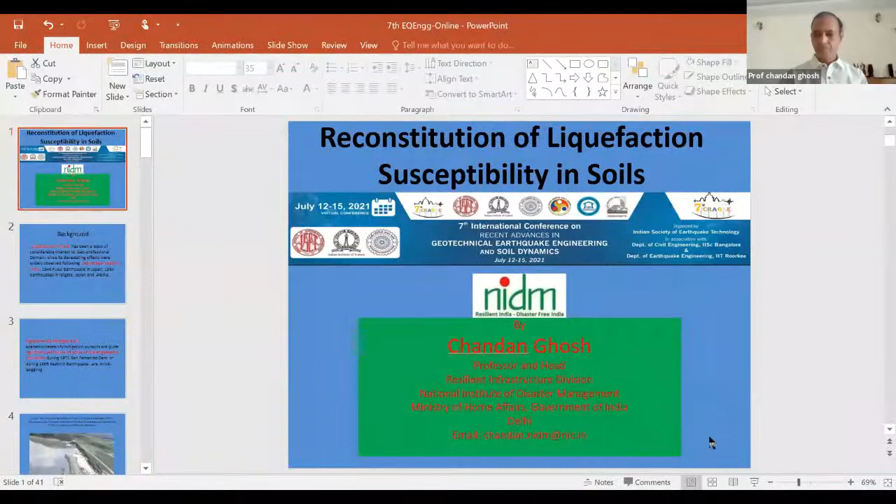So today's presentation is about an experiment conducted mainly in my room by one of the students, and also in a laboratory, that I would like to show how simple an experiment can be, despite all the talking, researching, and knowing so much about liquefaction.

So, reconstitution of liquefaction susceptibility in soil - this sort of experiment was never done in a laboratory. It was done in my office room, and also at HYCO, with Jitendra Singh, who is no more, but we conducted this test in his manufacturing hub in Naraina, Delhi, with the help of one of the students, Supratim Bhomik. I'm going to present this, which was done more than 6 years back but still not published.

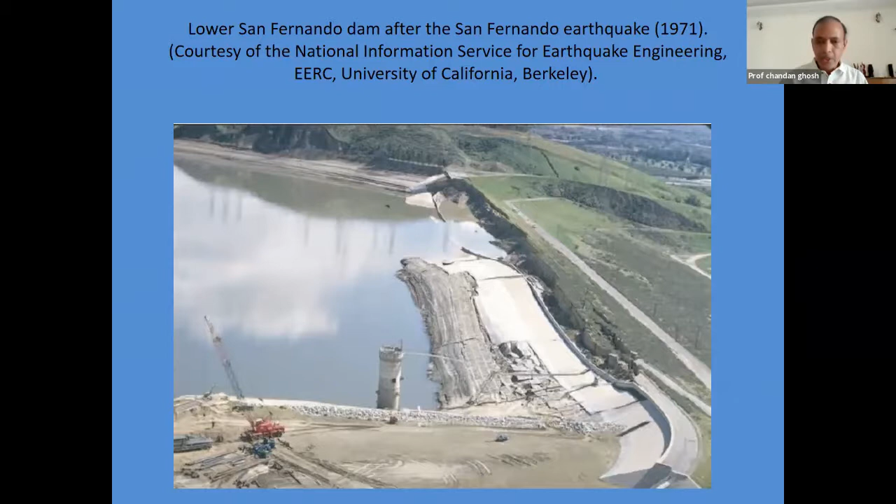Such things happened even in 2005 in the Kashmir earthquake - see what signatures it gave, where study is unending. There are more than 2,000 such instances counted - not research, because nature is the same, but in hilly areas our understanding of liquefaction, while basic, requires exploring and solving the problem, which is our main aim. From that count, there are many such reports available, even from the Muzaffarabad earthquake.

This is the most recent one, from April, which is more than 100 kilometers away from Guwahati. Even then we have it, because the Brahmaputra river basin is there. And the most important signature is this, that where the structure didn't fail, but liquefaction has occurred.

That has opened up many things, especially after 1969-70 onward, the SPT-based, CPT-based liquefaction study. I'm not going into that detail. I'll go directly into what inspired us to go for such kind of experimental study to visualize the liquefaction.

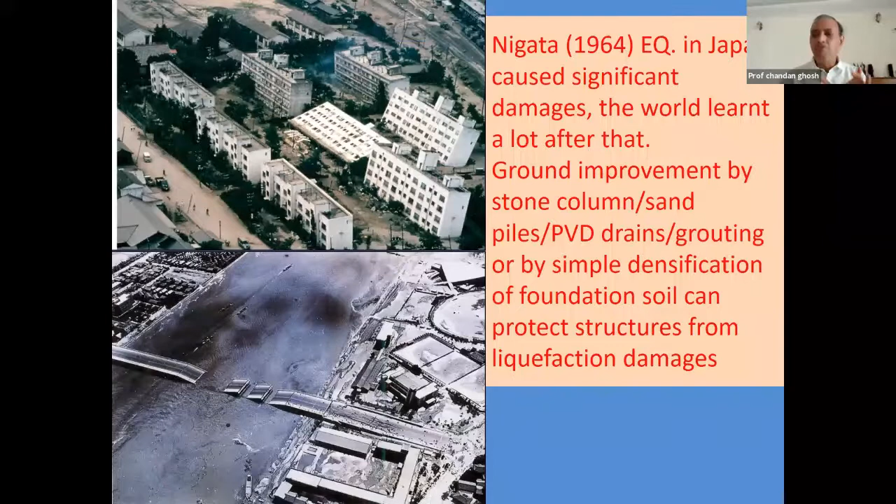In a most ordinary manner, but with clear fundamentals. This is the important investigation available in the literature, done in 1964 after that earthquake, about why it went wrong. Most cases involved reasoning and back analysis, saying this pier bent this way or that way due to lateral spreading - a new term that came up. We've done a number of such studies in centrifuge and shake table tests to recreate this situation, and also changed the codal guidelines in Japan and elsewhere.

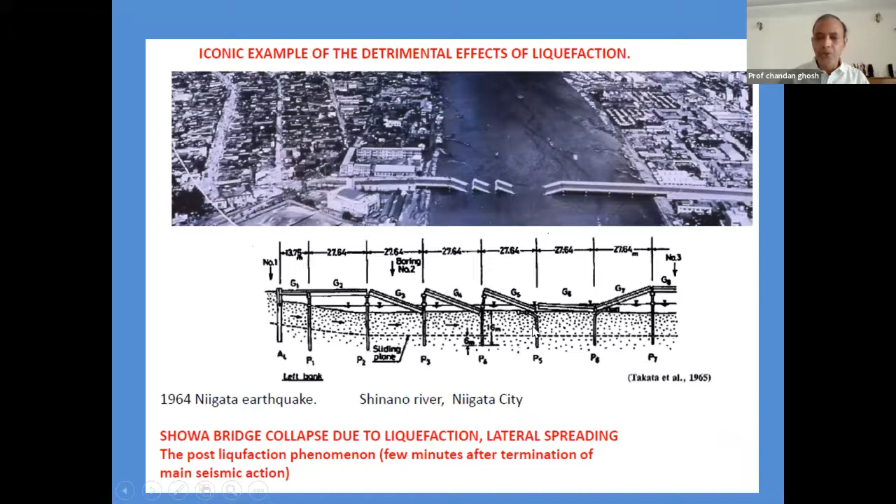Such revelations are well known, along with many laboratory studies, especially the cyclic triaxial test, which is very costly and time consuming, but yet very fundamental to understand liquefaction. So far the science of liquefaction is known and understood, but the application part and making it a simpler experiment is what needs to be looked into.

Most researchers successfully employed laboratory testing and theoretical analysis starting from the 1964 earthquake, especially 1969 onward, based on field penetration tests, then drew crucial conclusions on whether it is liquefiable or not. But in situ liquefaction study is also being done - instead of indirectly inferring from SPT, CPT or BPT data, rather going for SCPT tests to see whether liquefaction is occurring, or creating liquefaction in situ.

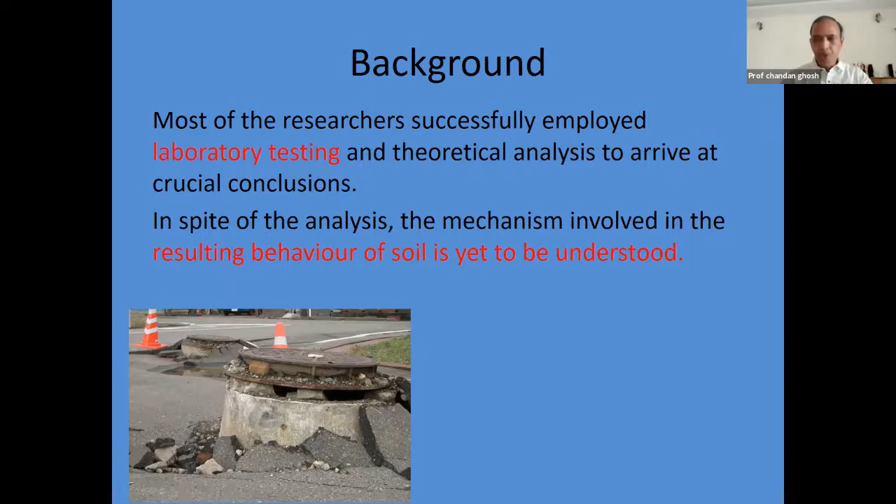But these are very fundamental as well as costly. They are more positive, and understanding becomes clearer through direct rather than indirect causation of liquefaction, which has attracted many researchers in this area. So despite the analysis, the mechanism involved in the resulting behavior of soil is yet to be understood to a larger extent. But still, this will keep going - since 1964 we have been doing this, and we'll keep doing it.

There are many things happening - retaining wall failure, floating of buoyant and buried structures. Thousands and thousands of such structures are being documented, recorded, and reasoned out as being due to liquefaction. But simply saying it is due to liquefaction doesn't satisfy us. We have to go for particular measures to deflate or reduce the pore water pressure, even where clogging occurs in many drainage systems, where they cannot function during that period.

So declogging of the same in situ - some of these measures have not come much into practice, especially when our earth structures face liquefaction in earthquake-prone areas.

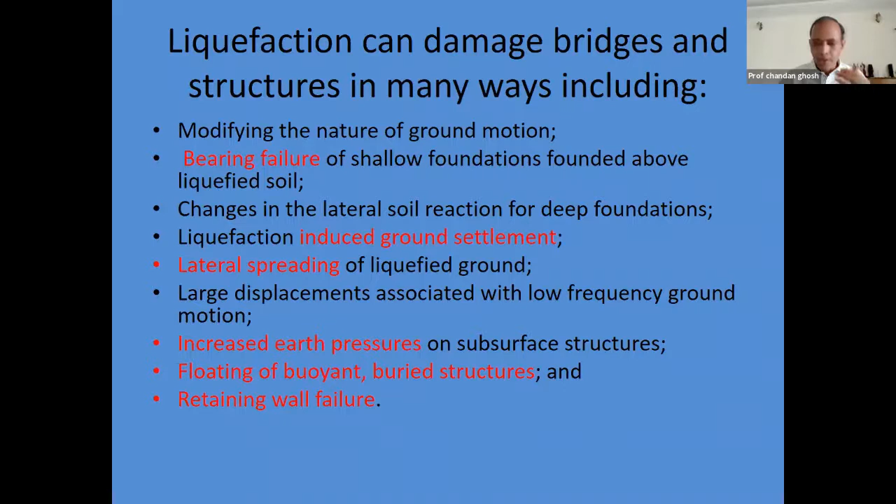So the scope of the lab study is to capture the liquefaction phenomena in sandy silty soil. We have taken 9 types of soil, particularly Yamuna sand. We have done seismic microzonation, where Dr., the chair of this session, was very much involved in the thick and thin of this microzonation study, making it to a 10,000 scale, published in 2015.

Initial internal excess pore water pressure measurement is one of the things during liquefaction. Just when liquefaction is happening, we do not have much live record of this, except in some systematic laboratory studies. Some systems are in place, and now we have many IoT systems to capture what is actually happening inside the soil. So we have tried to go into that.

Using an open stand pipe placed inside a loose soil specimen subjected to manual and dynamic excitation, which I'm going to explain in detail.

An attempt to avoid using costly equipment, because recently our high-speed train contract was taken up - bullet train from Surat to Bombay. There, every meter an undisturbed sample is to be taken according to specifications given by the Japanese organization, and triaxial test, cyclic triaxial shear test, everything has to be done. If as per those specifications along 500 plus kilometers all these tests are to be performed, it will take at least 10 years to complete, even if we establish 50 laboratories in the country.

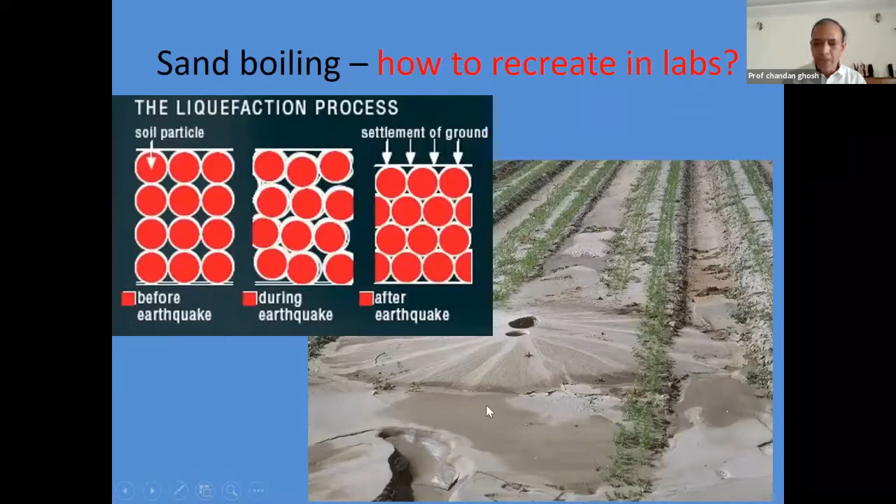So the inspiration for this work is whatever is happening - sand boiling - these are the things available in the literature. So we have taken out, trying to see how to recreate liquefaction in the laboratory. This is the kind of inspiration that has come from here, with the background that I wanted to say.

So creating a liquefaction effect by simply tamping in this manner. Taking a 500 ml Coca-Cola bottle or any kind of 500 ml plastic bottle, and a 2000 ml bottle, and also a 5-liter plastic bucket or container which is transparent, where we can visualize what exactly is happening there.

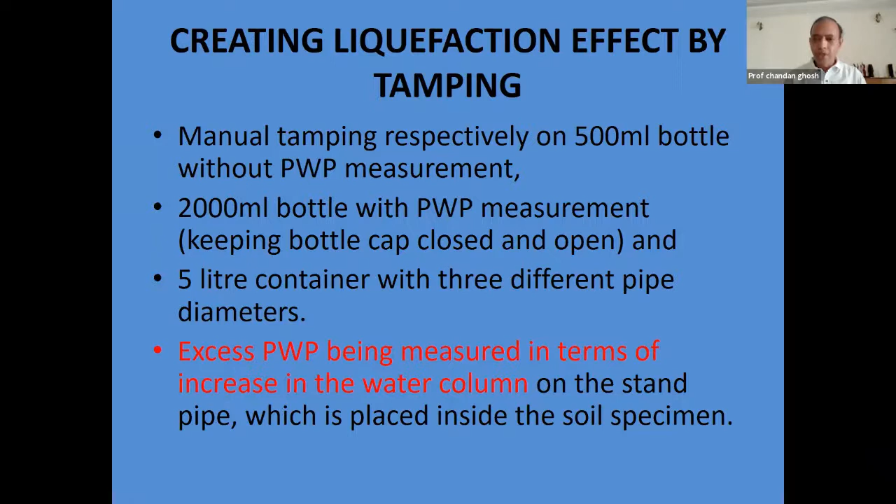Measuring excess pore water pressure in terms of increase in water column in a small 0.5 millimeter standpipe which is placed inside - that is equivalent to pore water pressure. Whatever water height is increasing, which is placed inside the soil, that is being measured.

So soil is taken here, different types of soils are taken and grain size analysis is being done. This indicates that there is some clay soil also taken, stone dust also taken just to measure. Clay soil doesn't liquefy. Even some stone chips are given, and coarse sand is also taken.

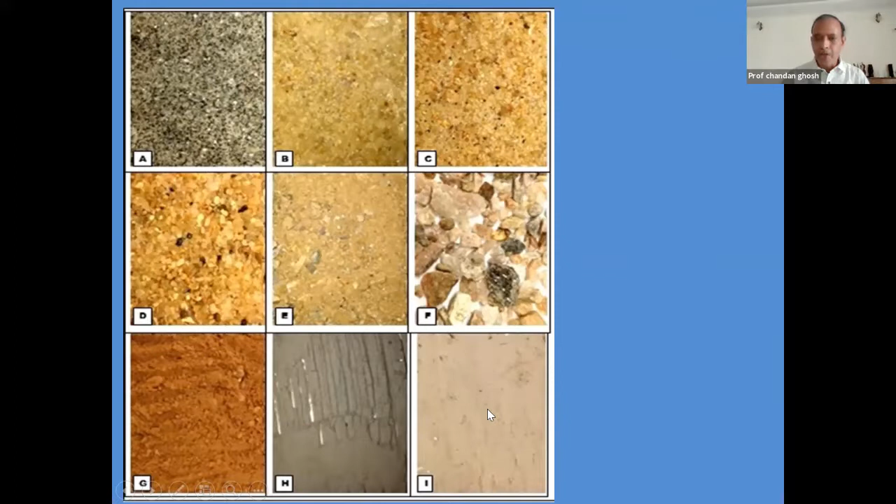So there are 9 different varieties doing the same series of experiments, and all are being shown over here - stone dust and Yamuna sand, one from Calcutta, and two soils from other river sand. These are all local names given over here. Fly ash is also taken because it is very simple.

I have to use only a bottle which is freely available. Fly ash is available nearby. So fly ash, stone dust, clay, pebbles, Badarpur well-graded sand, which is used in most of our household purposes. Then, because the researcher/student belongs to Tripura, he got 2 sands from Tripura - Khowai coarse sand and Gomoti medium sand near Agartala.

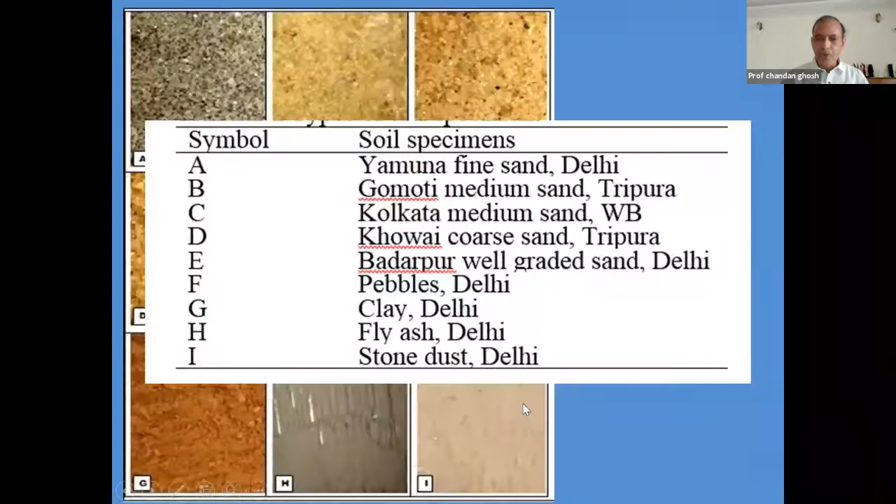So these are stone dust, clayey soil, and Yamuna sand - it is all written over here. In this case, we did not put any kind of pore water pressure device. We didn't put anything like that, but simply tamped the bottle, put the water, kept the cap closed, and some plastic balls are given.

Plastic, meaning rubber balls, are given to ensure that in this much sand, whenever preparing the soil specimen, it will be in the loosest condition if we make it this manner, and the ball that we have put inside should be embedded into the soil that we have taken.

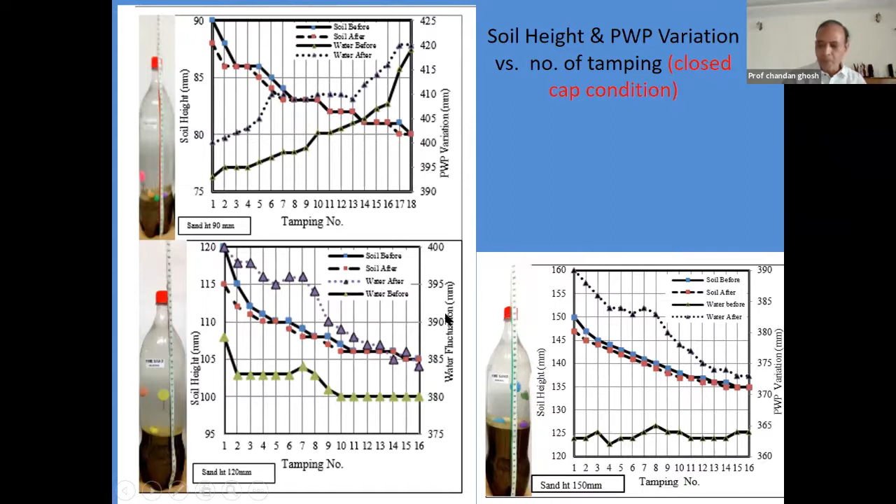In the closed cap condition, you can see the cap is closed. So all these things are being plotted. With this simple experiment, we are able to measure the pore pressure variation, water height before and after - everything can be measured over here. Similarly, water fluctuation versus number of tamping is recorded for each type of soil.

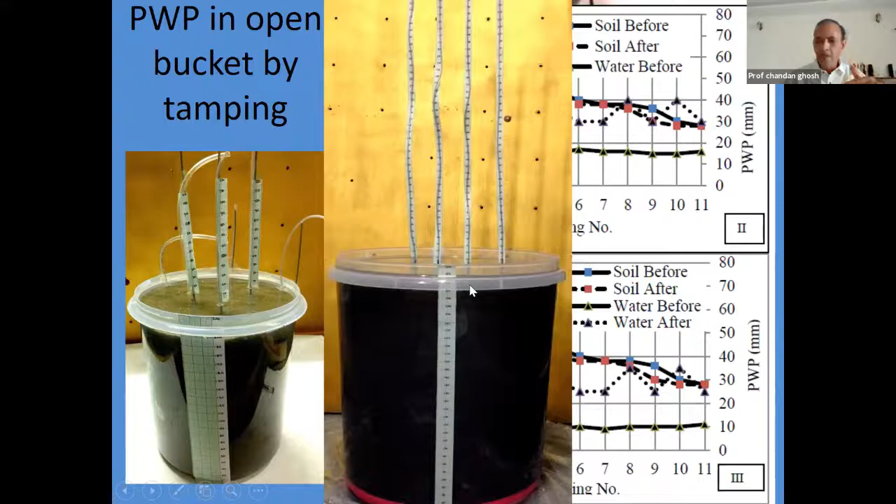We could see what the pore pressure rise is while varying the pipe diameter. So with each pipe diameter, how much variation occurs is also measured in this simple experiment. Here you see the systematic arrangement before testing, and this is after testing, where you see the water that came out. But measuring this, 3 pipes are placed at 3 different heights to check the relative variation of the pore pressure developed during this experiment.

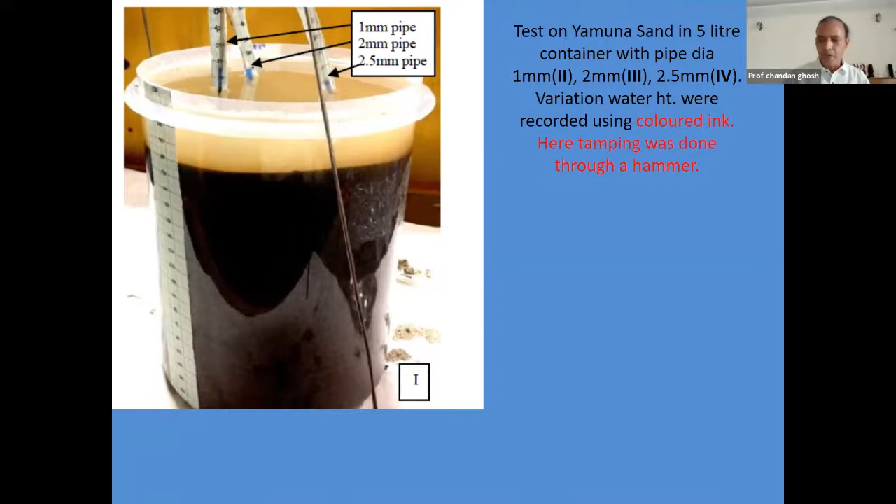Here you see 1 millimeter, 2 millimeter, 2.5 variation in water height, with colored ink placed inside so they can be differentiated. All these observations were made and results are plotted with this hammer height. We also checked in a standard jar how the sand height is variable - you see this much, this much, this much - to understand how liquefaction can occur, because we know overburden effect is an important consideration.

So we have done this type of test also to check up to what height or overburden liquefaction may occur or may not occur. So we captured excess pore water pressure during dynamic excitation.

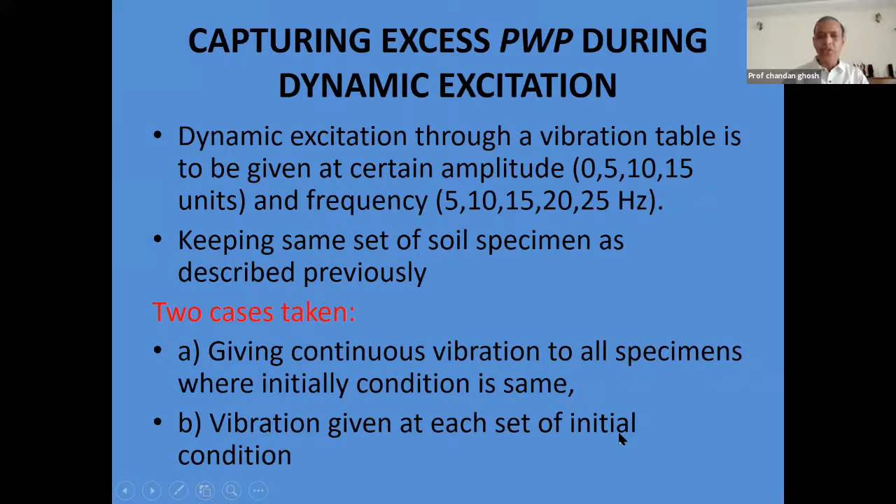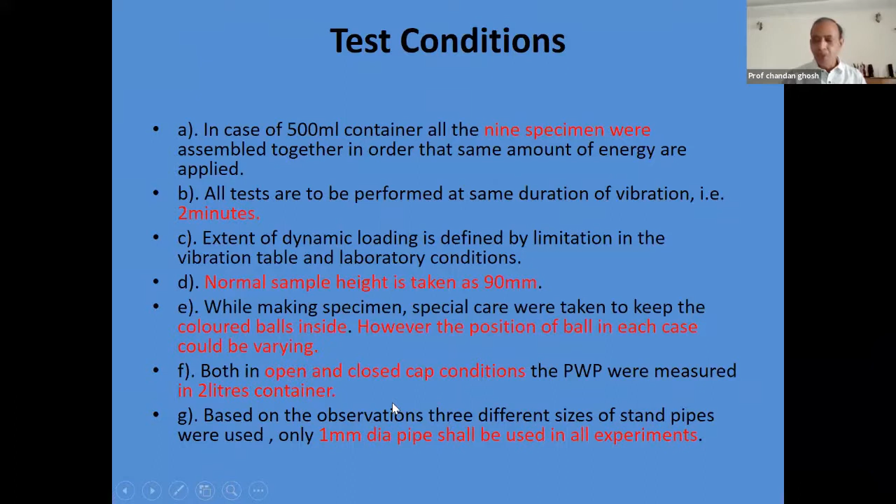Further work is also necessary. Things are not as simple as we thought; there are many ifs and buts. Accuracy matters too - many times we may say it should not matter much, but in some cases accuracy is important.

It is enough for the last 60 years or so to know the science of liquefaction, but recognizing where it is going to happen, rather than just saying these are the areas according to the seismic microzonation map where liquefaction potential exists or liquefaction is not going to occur - that is one part, but going for direct liquefaction measuring is really helpful.

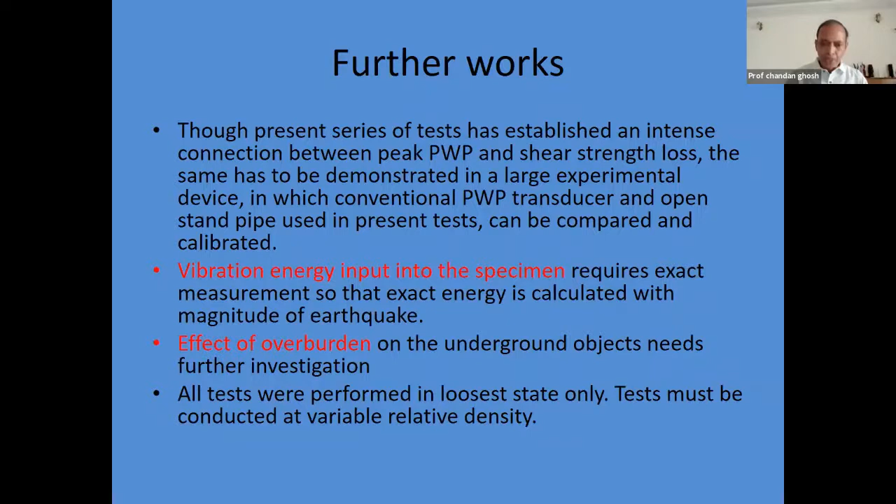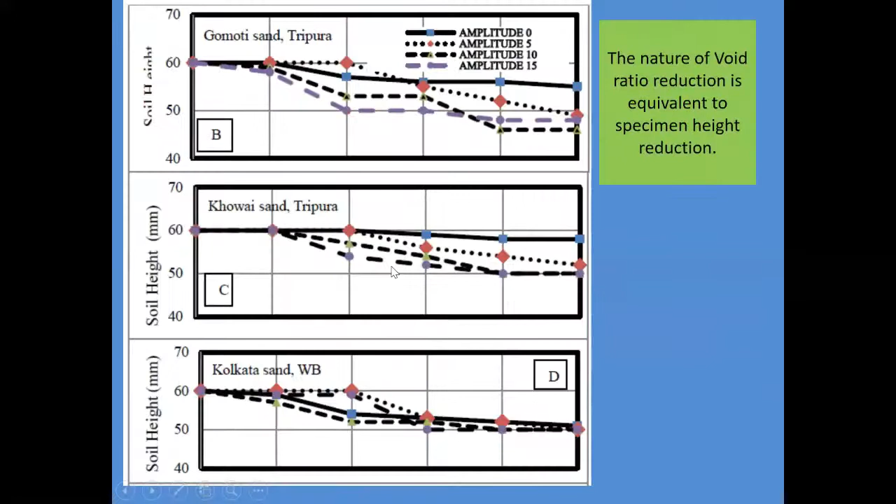So variation of soil and frequency - these results that we have taken, of course there's not much time to describe all of them, but the nature of void ratio reduction is equivalent to specimen height reduction.

These are all plotted - height versus frequency and amplitude versus frequency, and also the container with excess pore water pressure in the large container is shown, along with various levels of sophistication. We tried measuring 50 millimeters from the bottom of the container at different heights.

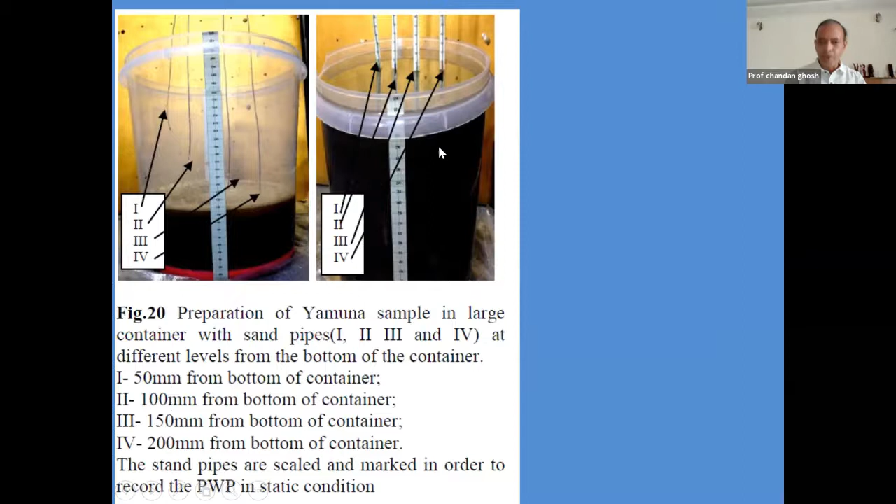Four such pipes are placed so they can capture liquefaction - at 50mm, 100mm, 150mm, and 200mm from the bottom along this setup. These were set during experiment preparation, and results are presented here.

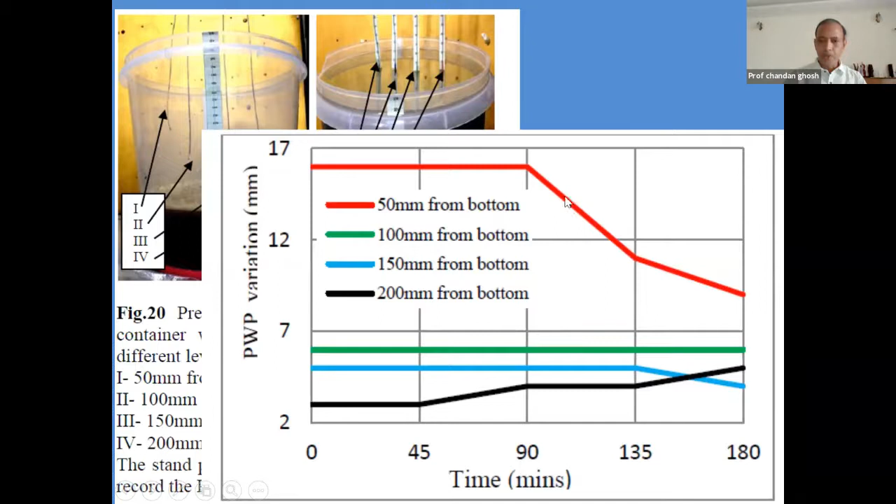At 50 mm you see the drastic reduction. With time, you see how it is being reduced. This shows the arrangement made before and after - due to vibration, as well as tamping by hammer, which was also done.

Pore water pressure variation with frequency - whatever frequency we gave, because we know earthquake frequency varies maximum around 5 to 15 Hz. We kept this in mind so our frequency variation in the laboratory stayed within that range, since 5 to 20, or maximum 5 to 50, is the dangerous range.

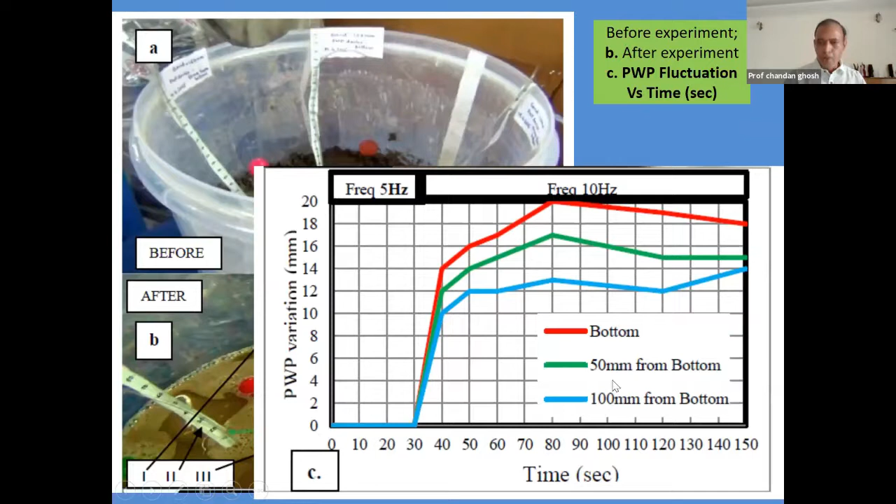So in that range, we observed how the bottom 50 millimeter sensor and the bottommost one varied in pore water pressure, expressed in millimeters.

Conclusion: experiments on the large bucket gave full understanding of the liquefaction phenomena, in which pore water fluctuations were measured and presented with duration of vibration input within the standard range of earthquakes that affect our structures. Underground utility response was tested with lighter rubber balls and heavier balls, showing a marked example of liquefaction induced buoyancy effect.

The effect of overburden was tried by keeping the object at a fixed level, but under the present context, no liquefaction effect could be seen. However, in all the tests, except for low energy input - say amplitude 0 and 5 Hz - Yamuna sand taken from Delhi showed marked liquefaction.

So finally, I want to say so much about proving science - of course proving science through testing, checking, laboratory work, direct measurement, and many sophistications that we have done. The science of pore water during liquefaction is really known to us.

But what nature has ordained to mankind from the beginning - the slides, or thousands of such failures that have taken place - in that case, going in one direction of knowing the liquefaction opportunity or occurrence, we have known that liquefaction will occur, but there is hardly any proof, whether through microzonation or through such laboratory and field study, that liquefaction identification maps have been made.

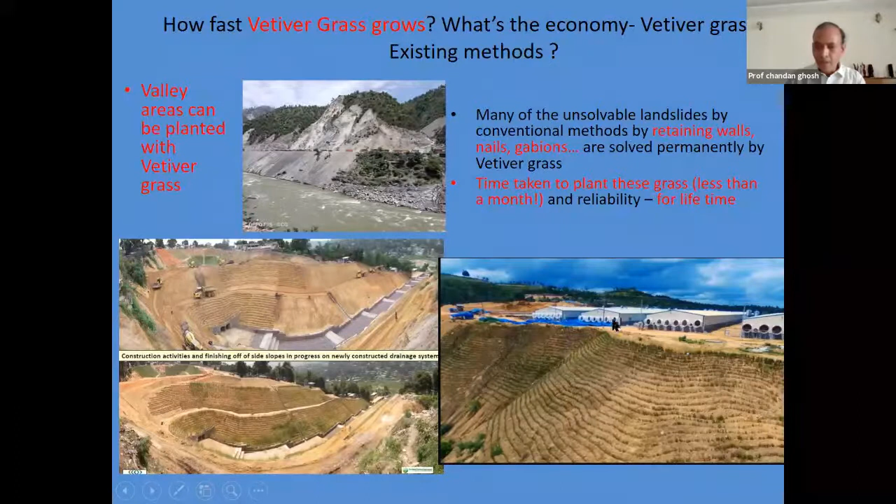So in that regard, we must go back to what nature has been telling us. Not saying this is exclusive, but many such geostructures and earth structures carry such scars in our construction. This is Jammu, where highway construction is going on, but here no retaining wall or nailing is done. It is simply stabilized by nature's gift, that is grass. This has given us such learning, that we can change our way of living and thinking using this simple erosion control measure.

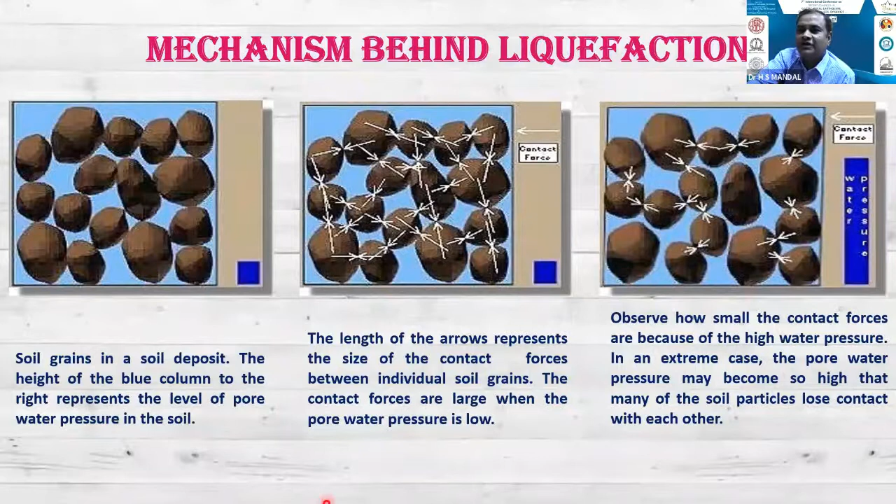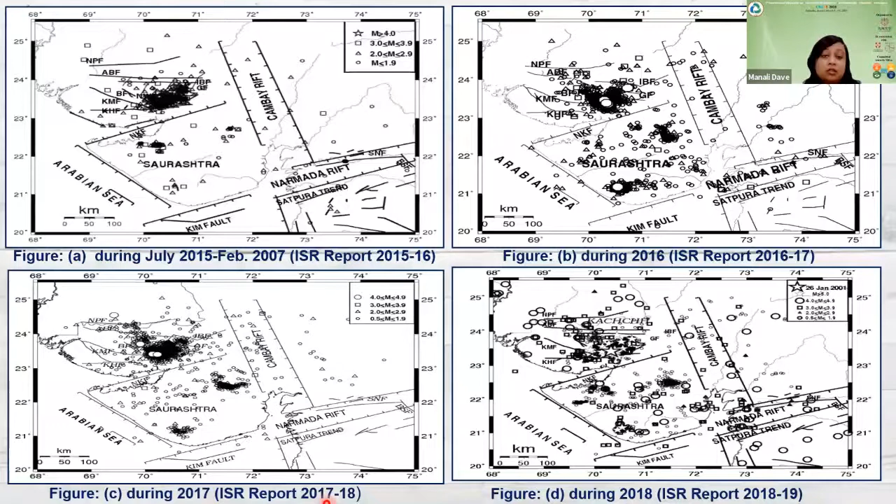These are the ISR, Institute of Seismological Research reports, and this shows the past earthquake data. This is the study area, Ahmedabad city, which falls under zone 3.

The historic seismicity of Ahmedabad is related to the Cambay fault, near Cambay East, Cambay West, and the Son Narmada fault, which are very active faults. Due to the Bhuj earthquake, Ahmedabad was also affected, so it is not only a near field but also a far field source of earthquake.

We need to study the anthropology of various aspects like area, coordinates, population of the city, historical monuments and industries, as well as geological aspects such as the type of soil and the condition of the Sabarmati River.

The Sabarmati River in Ahmedabad city originates from Rajasthan's Dhebar Lake, and it carries alluvial soil deposits.

The silty soils are the most prone to liquefaction, so in Ahmedabad city, most of the soils are silty soil.

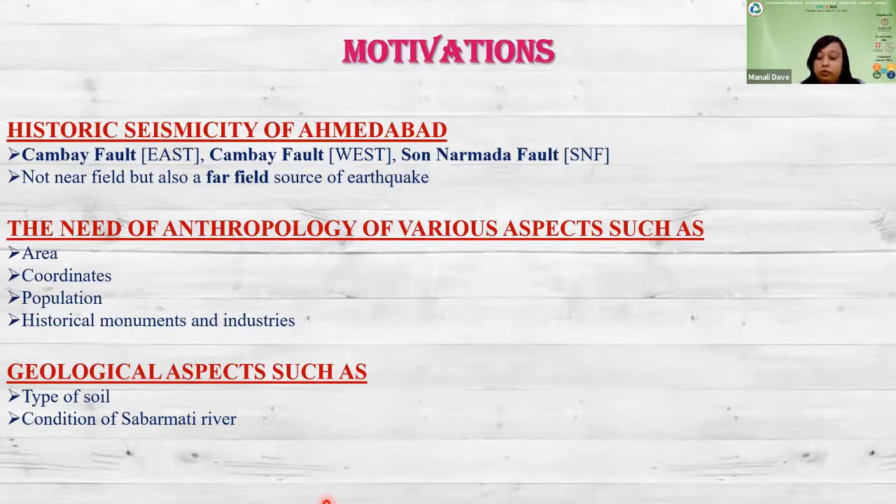The construction of the riverfront made the water table very high, and a recharge well was required as per AMC guidelines: one recharge well at every 500 meter square area is necessary.

With the upcoming construction due to high population and scarcity of land, there's vertical construction on filled up soil. Many ponds, like 56 ponds in the city, were filled up in past years to arrange space for apartments, so many buildings are standing on sandy soil.

As per the Bureau of Indian Standard, the city falls under zone 3, which is the moderate zone of earthquake. That's why the liquefaction assessment is necessary.

Coming to the literature review, we have reviewed various papers. I'm not going much into the detail.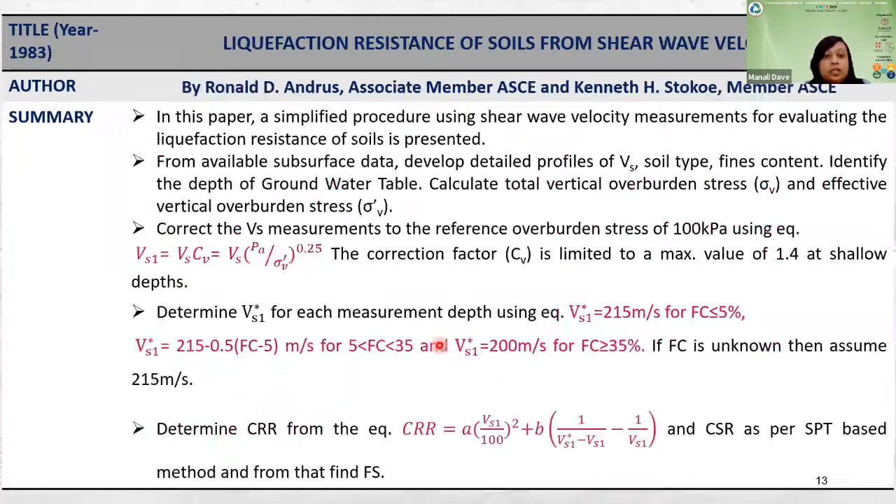Soil characterization, as we all know, Ahmedabad has silty soil, so most of the area is covered by silty soil and sandy clay.

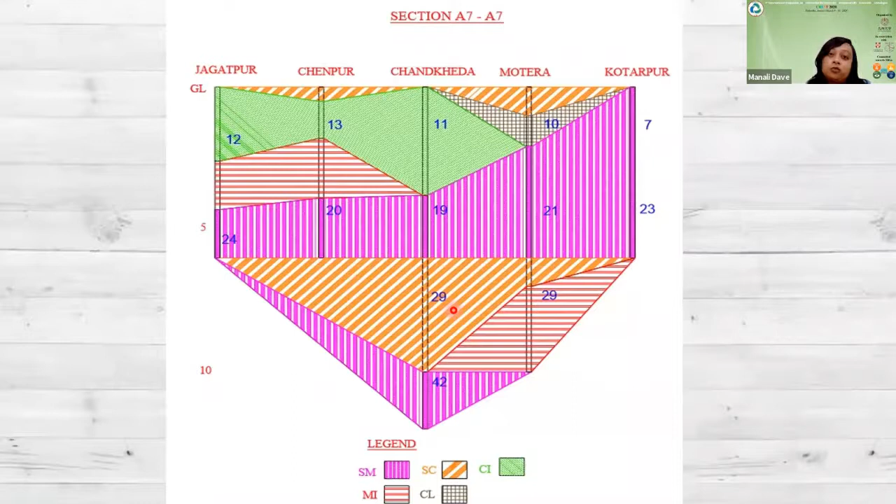These are some site characterizations we did. We collected the borehole data, and silty sandy soil is there.

Two methods we have adopted: the Idriss-Boulanger method and the Andrus and Stokoe method. Then we come to the results.

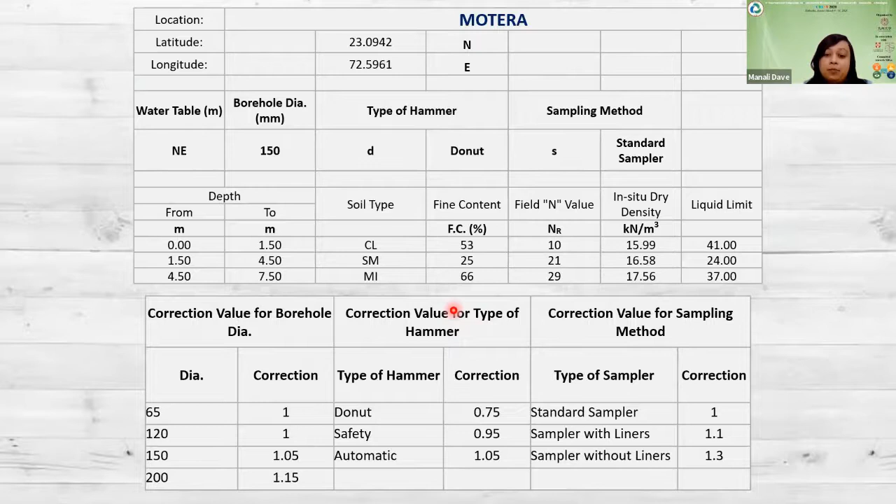I have taken one example. We did the liquefaction analysis of 88 areas of Ahmedabad city, and from that I took one example. We did the detailed calculation from the fine content, hammer type, sampling method, and type of sampler we used, and we applied all the corrections.

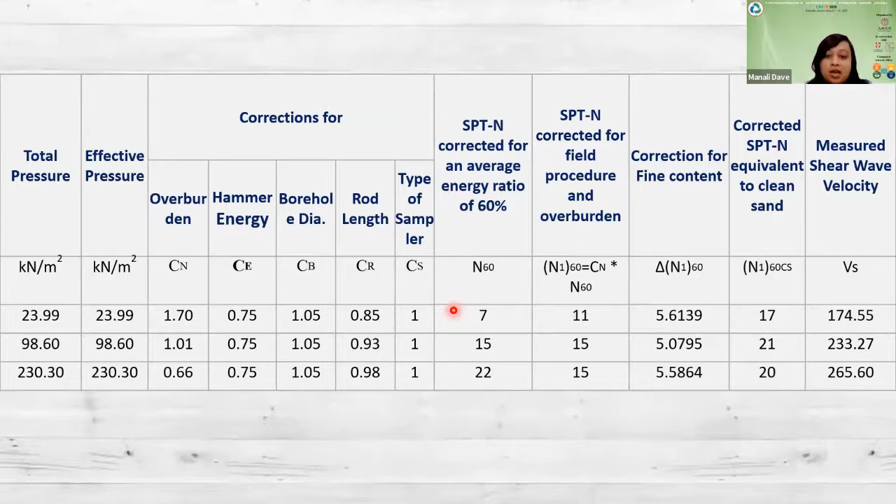For N160CS, the clean sand equivalent, we converted the SPT value to the clean sand equivalent, and the shear wave velocity we took from various equations that past researchers have provided.

Then this is the total pressure and effective pressure. Then we found the CSR and CRR, and finally the factor of safety from these two methods.

We took the magnitude as 7.7, the Bhuj earthquake magnitude, and we took the peak ground acceleration as 0.3g. We also assumed that if the water table rises to ground level, then we calculate for that too.

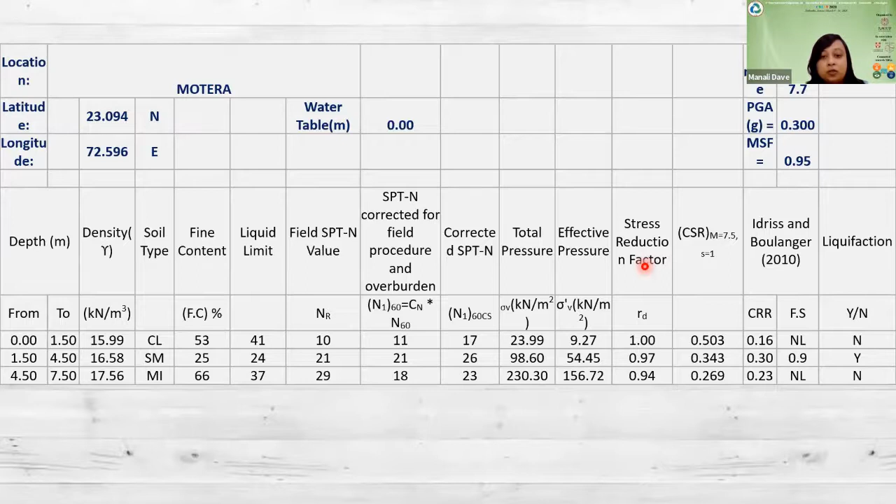I have not included that here, but we assumed the water table is at ground level, and we also did the calculation for the same.

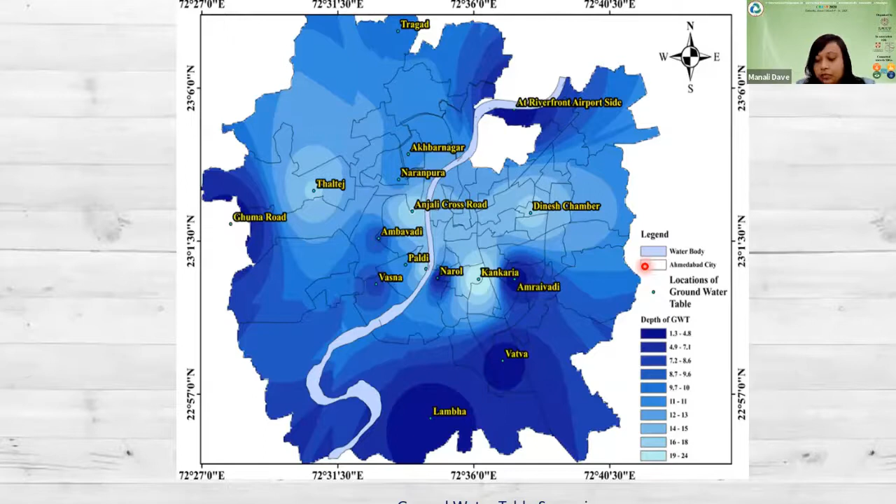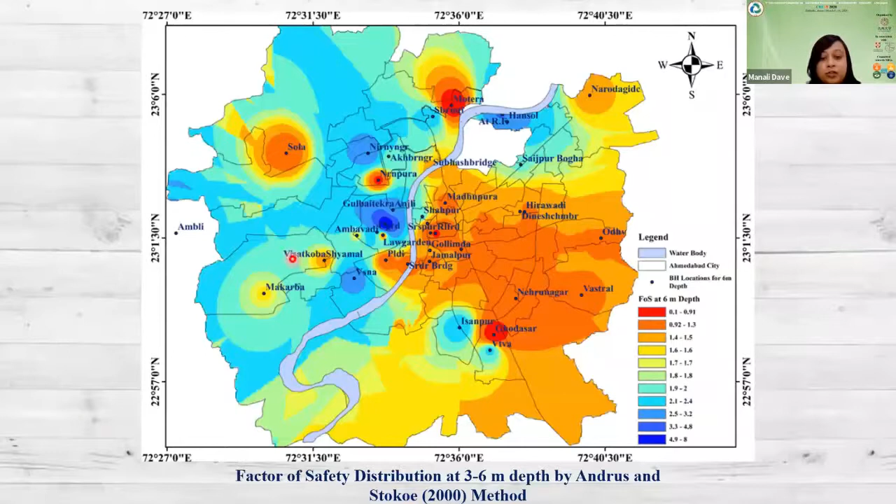These many areas are liquefied, and these red areas tend to liquefy. Then we did the factor of safety distribution at 3 to 6 meter depth by the Andrus-Stokoe method, and this by the Idriss and Boulanger method, and found the factor of safety for this particular city.

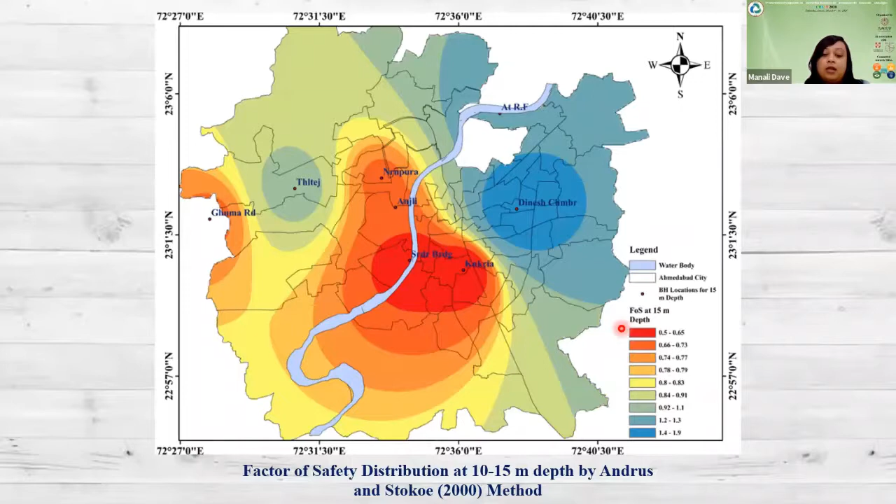And this 6 to 10 meter depth, similarly by both methods, and 10 to 15 meter depth by both methods. So finally we come to the conclusion that we incorporated two methods: Idriss and Boulanger 2010 and Andrus and Stokoe method.

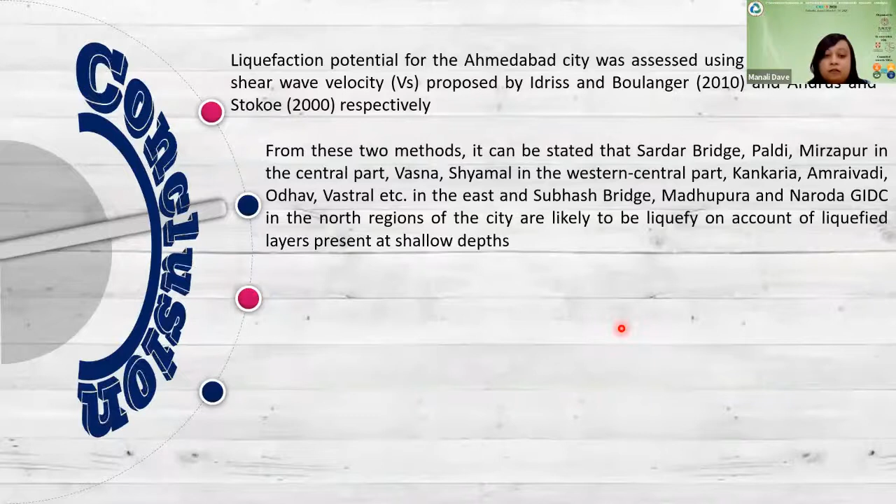In the central part, as you can see in the graph, the area tends to be more liquefied because of the riverfront, the Sabarmati River water table level. Some areas are not liquefied, and liquefaction maps have been generated.

This gives a primary idea about the liquefaction, so we can do the urban planning accordingly. These are my references, and if you have any questions...

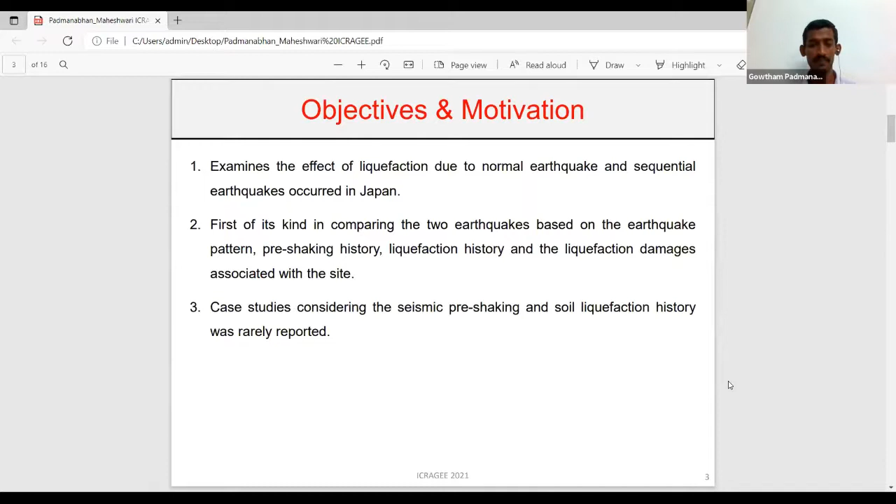Coming to case study 1, this is the Kumamoto earthquakes that occurred in 2016. It belongs to the category of sequential earthquakes - three earthquakes of magnitude 6.5, 6.2 and 7.3 occurred on successive days in the Kumamoto region. In general, earthquakes with magnitude less than 6 are not considered for liquefaction analysis, as they don't have that much potential to create or induce liquefaction.

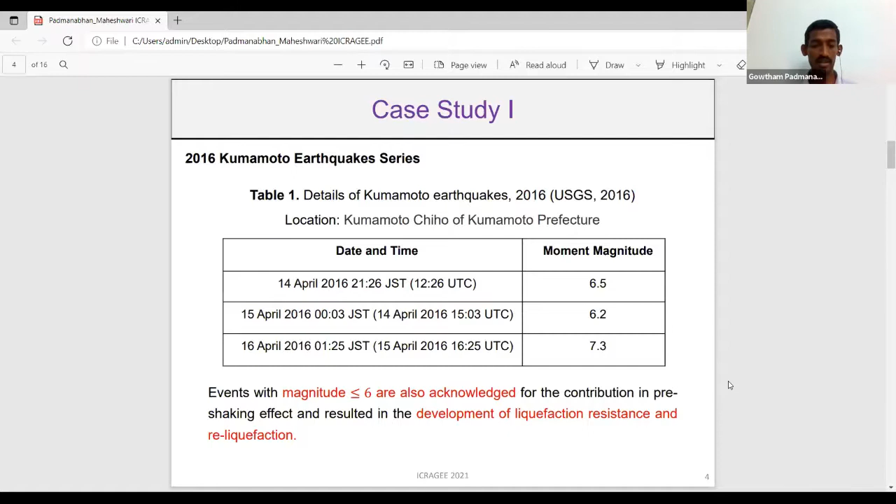In our study, we have considered all the earthquakes observed in the Kumamoto region in 2016, as it has significant potential in inducing liquefaction resistance and triggering reliquefaction. A total of 1,157 earthquake events were observed in the specified duration from April 1 to May 31st. We have listed out all the earthquakes based on magnitude, shown in Table 2, and mapped their occurrence based on USGS data.

It is important to note that before the occurrence of the 2016 earthquake, the Kumamoto region had a rich history of liquefaction, and was found to be classified as a moderate to significant liquefaction vulnerable zone. Despite three earthquakes of magnitude greater than 6 occurring, the damages reported associated with the Kumamoto earthquakes were found to be limited compared to previous earthquakes.

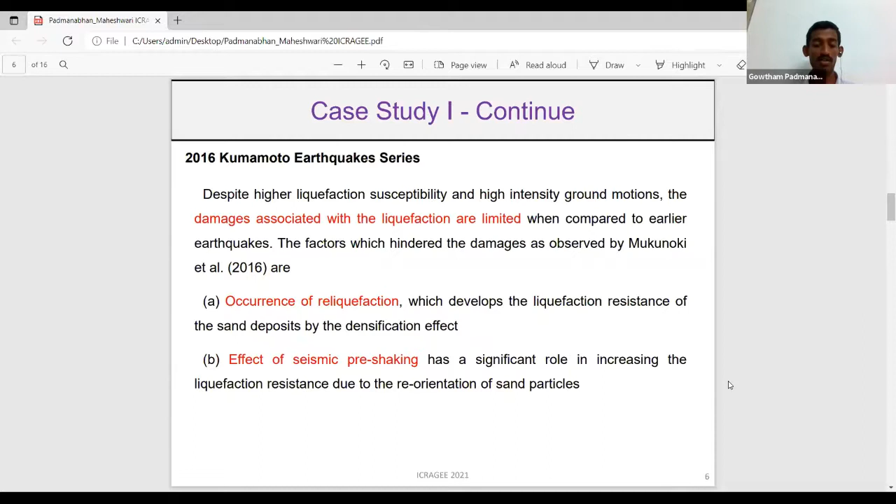According to reports published by Mukunoki et al. in 2016, the occurrence of reliquefaction and the effect of seismic pre-shaking may be the hidden factor in limiting the generation of excess pore water pressure and in developing liquefaction resistance, due to the densification effect from reliquefaction and the reorientation of sand particles caused by seismic pre-shaking.

Coming to case study 2: the Fukuoka Ken Seiho-oki earthquake, which occurred in 2005, a single earthquake event of magnitude 7. It is to be noted that Fukuoka is not a seismically active zone compared to other parts of Japan. Despite this, the earthquake was free from seismic pre-shaking and had reduced liquefaction susceptibility.

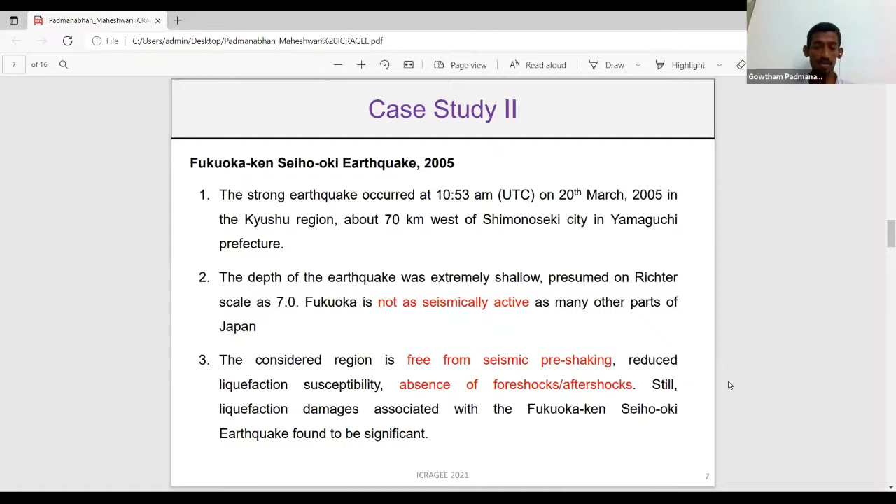It is to be noted that there is no presence of foreshocks and aftershocks in this observed earthquake. Still, despite these factors, the damages observed during the Fukuoka earthquake were found to be higher, resulting in a lot of economic loss and loss of human life, as reported by Nakase et al. 2006.

Coming to the discussion of this finding: despite the larger number of earthquake occurrences in the 2016 Kumamoto earthquake, the damages were found to be limited compared to the 2005 earthquake. This invites the attention of researchers to work on this particular area. So what are the factors that hinder the generation of liquefaction and increase resistance? In our study, we have identified some parameters which could have a potential reason.

The first is the presence of foreshocks and aftershocks. As per El-Sekelly et al. 2014, based on field and experimental observation, he reported that any presence of foreshocks and aftershocks associated with the main shock event will provide resistance to excess pore water pressure, resulting in reduced liquefaction.

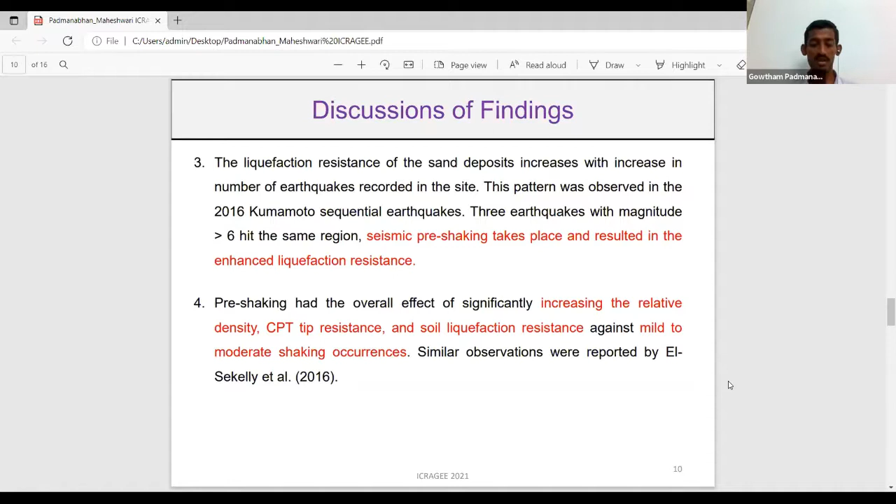Coming to the second parameter we consider: the effect of pre-shaking. As per the database of the Kumamoto earthquake, it is found that 3 earthquakes of magnitude greater than 6 were observed, and seismic pre-shaking took place. Other experimental studies found that it will enhance liquefaction resistance. Similarly, El-Sekelly et al. in 2016 reported that this pre-shaking has the potential to increase relative density, CPT resistance, and soil resistance against mild to moderate shaking. So in such cases, this increased resistance may be associated with this pre-shaking.

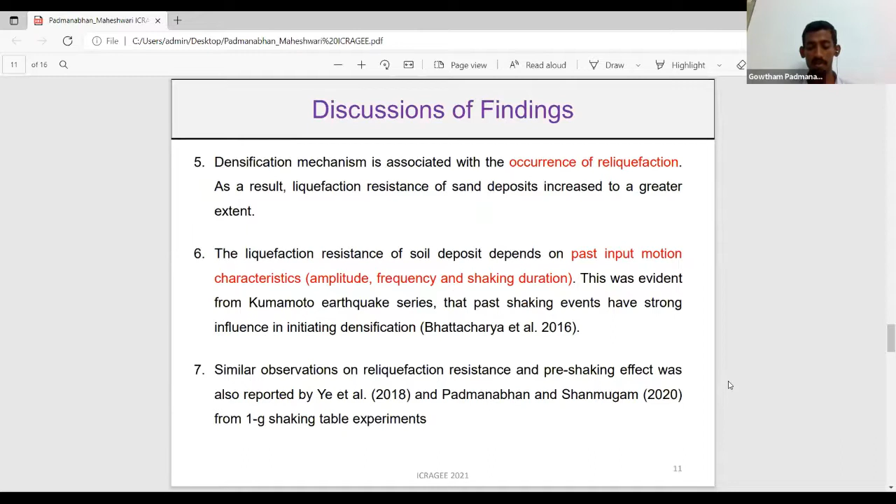Coming to earthquake shaking: as mentioned earlier, the Kumamoto region has a rich history of liquefaction, so this could also be a conclusive factor resulting in increased resistance, as reported by Bhattacharya et al. in 2016. So the rich liquefaction history has induced some resistance to liquefaction and its associated damages, as compared to the 2005 Fukuoka Seiho-oki earthquake, which was new to liquefaction and where damages were found to be higher.

Finally, some results published by Dobry et al. in 2019 show that pre-shaking, even though it lasts for a shorter time and may be from a smaller earthquake event, has its own influence in increasing liquefaction resistance.

As per some experimental evidence presented, the pre-shaking event has a potential to improve the resistance to liquefaction, as it results in increasing sand density. The limitation of this study is it can be applicable only to the specific site and those magnitudes of earthquake, as rightly pointed out by the presenter, Professor Chandan Ghosh.

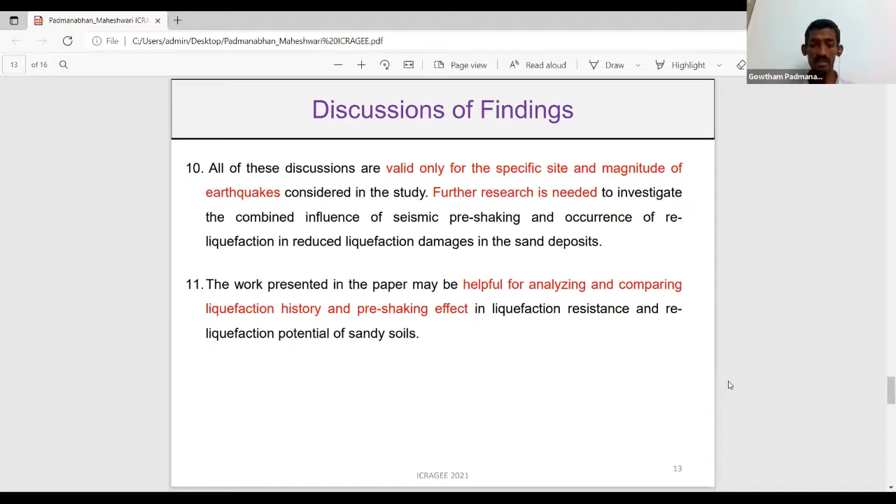Much more research has to be devoted in this area. In spite of earthquake magnitude, there are many other factors like pre-shaking, liquefaction history, and reliquefaction that have significant potential in inducing damage or resisting damage. This paper will be helpful in analyzing and comparing liquefaction history and pre-shaking effects, and also for planning any ground improvement technique in such sites.

Coming to the conclusions, this study is an attempt to consider some of the hidden parameters in inducing the liquefaction phenomena. We state that the mentioned parameters like pre-shaking and reliquefaction potential need to be considered in any earthquake analysis, apart from single earthquake case studies. Successive earthquakes or combinations of foreshocks and aftershocks have significant influence in inducing liquefaction and reliquefaction, and these parameters should be considered in analysis for ground improvement studies.

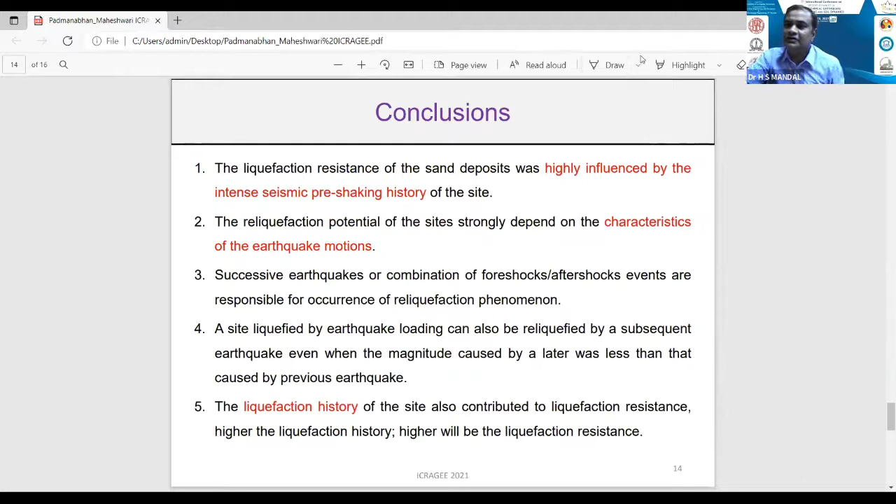Thank you, Gowtham. Thank you, sir, Gowtham Padmanabhan, you have presented very nicely. It is like liquefaction that you can predict in particular places, am I right? Sir, it is like comparing two earthquakes of different patterns to analyze, yes.

So can you say why you have chosen Japan only? Sir, as we know, Japan is very prone to liquefaction and earthquakes. So when we were looking for similar case studies observed for comparison, we took these earthquakes.

But you can try for India also, you know. That liquefaction for Japan, in Assam and some Bhuj earthquake and some Tripura 2017, there was an earthquake in those places. So you try for that area also, and you predict something. It's very good, nice presentation.

And can you say that like tsunami, that a 6.5 magnitude undersea tsunami may occur or be predicted? Can you say any threshold magnitude that can give liquefaction at a site?

Sir, normally more than 6.5 magnitude earthquakes. No, but 5.7 magnitude also, Tripura also occurred. Tripura recently, that earthquake occurred, okay, and liquefaction occurred. So you have to estimate and predict what critical magnitude, sure sir, liquefaction may occur in particular places under favorable conditions. Okay, sure sir, that is a very good topic, and I thank you.

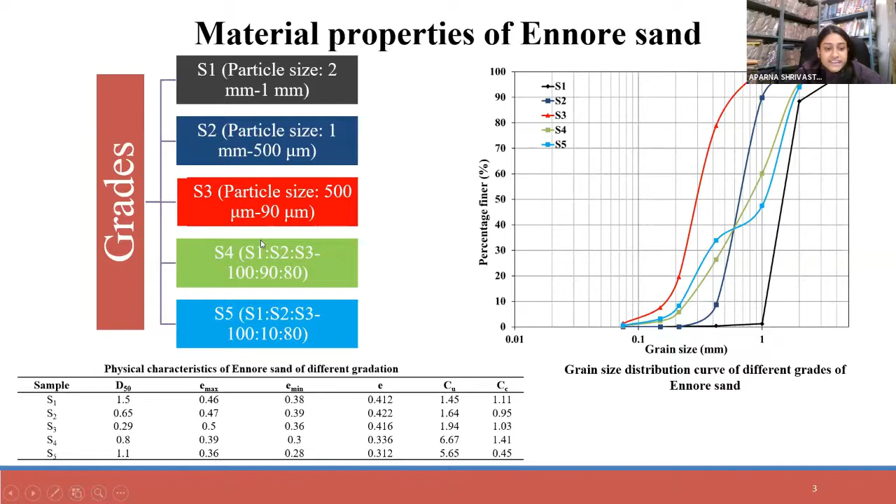For the present study, an electromechanically dynamic cyclic simple shear apparatus was used. The specimen size was 70 mm diameter and 20 mm height, and the specimens were prepared at 60% relative density using the dry tamping technique. The procedure is as follows.

First, the specimens were saturated by percolating de-aired water from the bottom of the specimen at a seating pressure of 5 kPa, followed by K0 consolidation at a vertical effective pressure of 100 kPa. Then the specimens were cyclically sheared at different cyclic stress ratios, that is 0.1, 0.075, 0.05, 0.03, at a frequency of 0.1 Hz for all 5 grades of Ennore sand specimens.

Now coming to the results and discussions, the figure shows the hysteresis response of all 5 grades of Ennore sand at different cyclic stress ratios. We can see that at a higher cyclic stress ratio, that is 0.1 and 0.075, rapid and large shear deformations were observed for all 5 grades of Ennore sand.

Also, we can see that S3, the red graph, at a CSR of 0.1 exhibited the highest total accumulated plastic strain. That could be attributed to S3 lying in the range of fine sand gradation, which can have lesser frictional resistance as compared to S1, which lies in the range of coarse sand particles.

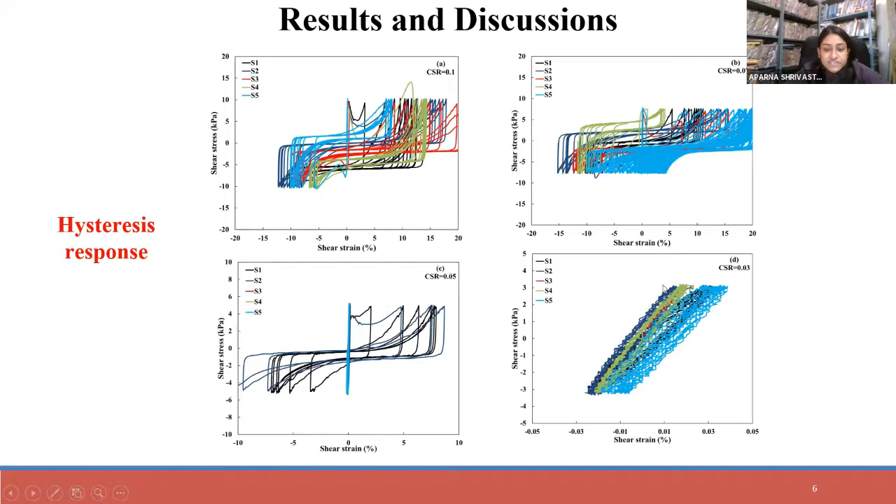In case of lower cyclic stress ratios, that is 0.05 and 0.03, we can see that for 0.05, only S1 and S2 exhibited shear deformation of about 9%, whereas S3, S4, S5 exhibited very less shear deformations. However, in case of CSR of 0.03, all the specimens S1 to S5 exhibited very insignificant shear deformations. Moving on to the equivalent pore water pressure ratio.

Liquefaction was defined in a manner that when Ru, the equivalent pore water pressure ratio, became 1. In case of CSR of 0.1 and 0.075, we can see that all of the specimens S1 to S5 failed within 2 cycles itself, and there was almost no variation in the response of equivalent pore water pressure ratio for all 5 grades in case of higher cyclic stress ratio.

However, in case of small cyclic stress ratio, that is 0.05 and 0.03, the number of cycles to liquefaction increased. We can also observe that with increase in fine sand content, that is S3 compared to S1, the number of cycles to liquefaction increased. That can be because of the more number of point contacts in the fine sand particles.

Now coming to the cyclic resistance ratio, which is defined as the cyclic stress ratio at 20 number of cycles to liquefaction. We can see that the CRR value corresponding to 20 cycles increased with increasing fine sand content, and was higher for the well-graded sand. So we can say that the cyclic strength of the sand increased with increasing fine sand particle content.

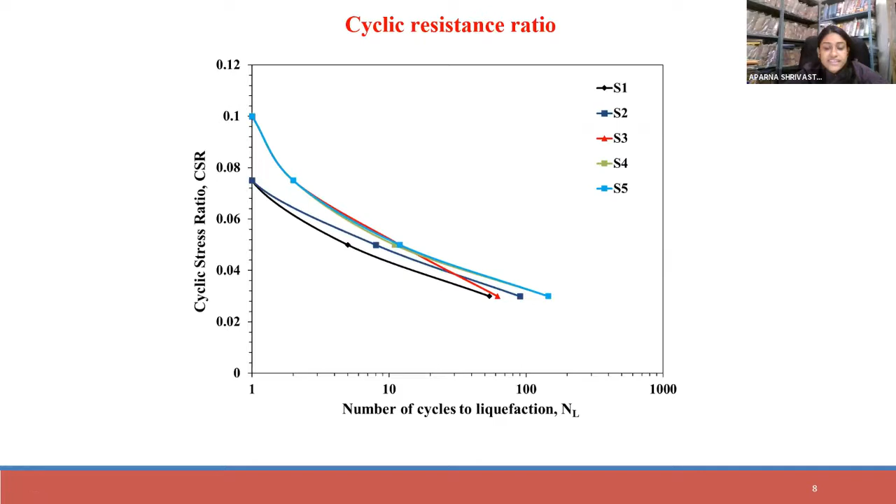Now coming to the dynamic parameters, that is shear modulus. Delta represents the cyclic degradation index, which is defined as the shear modulus at the nth number of cycles to the shear modulus at the first cycle.

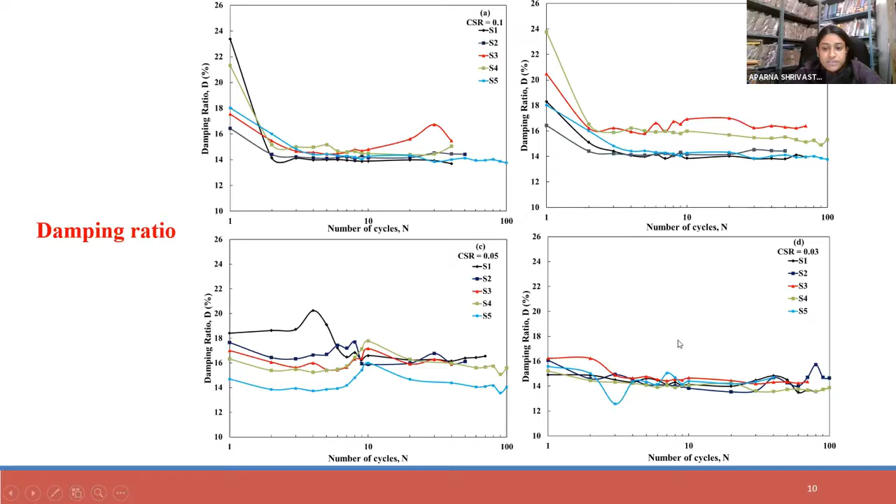Okay, thank you Mrs. Aparna, you have presented very nicely. It is a cyclic simple shear test, and you have estimated the effect of CSR value.

But I want to ask, what confining pressure have you taken, 100 kilopascal? 100 kPa, yes sir, vertical pressure of 100 kPa. But if it is loose sand, how will it be sustained within the sample? Can you explain?

Sir, in the cyclic simple shear test, we use Teflon coated rings. First the membrane is put, then the specimen is prepared using dry tamping technique in the mold itself, and the plunger is pushed down so that it gets locked into it, and it is monotonically tightened. So the plunger and the specimen are held in place this way.

Clean sand, can it be molded? If you give some percentage of clay or silt, then it can be molded. It was prepared by dry tamping, sir, just in the mold itself, dry tamping technique.

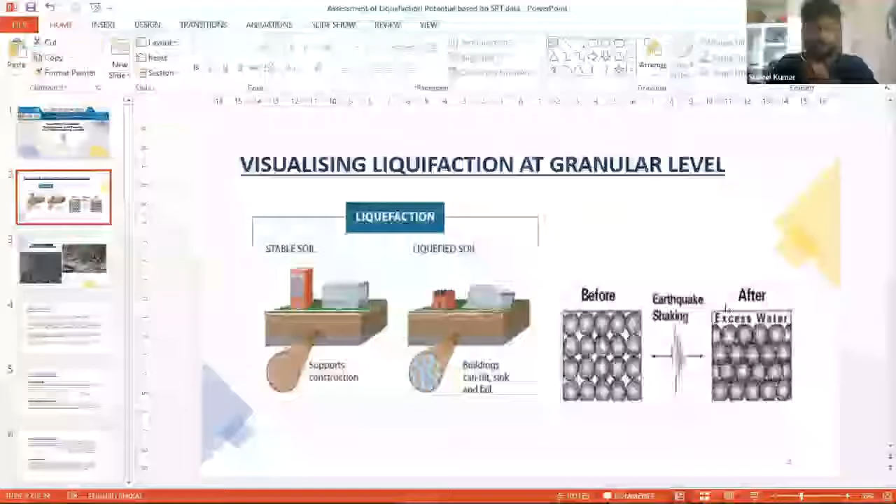Introduction: usually we consider liquefaction when there is huge loss of life at a disastrous level, and loss of property also. During earthquakes, liquefaction is one of the major causes of damage, and we need to address it. To avoid destruction, the assessment and prediction of liquefaction on sandy soils has attracted considerable attention in recent years, specifically soft computing techniques like artificial neural networks, support vector machines, and genetic algorithms have evolved with time.

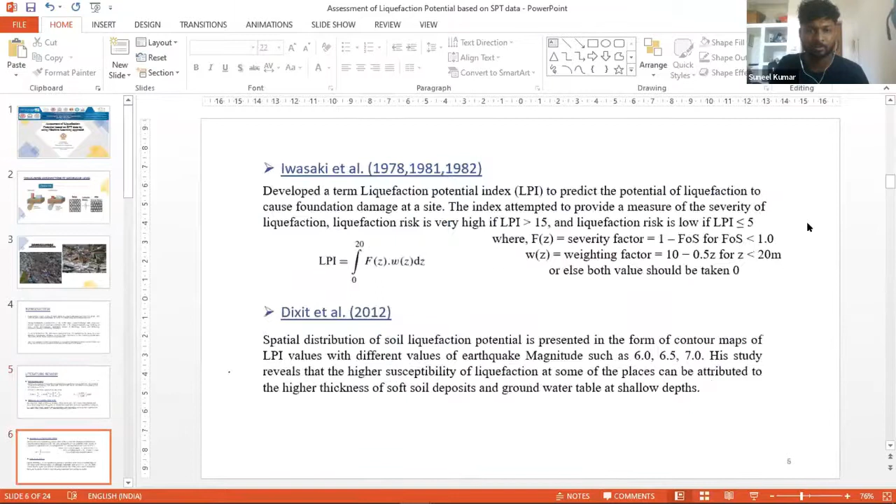My core emphasis in this presentation is to predict liquefaction based on SPT data using various regression and classification techniques in RStudio. These are various researchers who worked on ANN, SVM, RVM and genetic algorithms. Critical review: till date, although there is huge potential for R programming, especially to solve many soil-related problems using various inbuilt packages.

Till date, very little emphasis has been given to R in predicting and assessing geotechnical properties. The table shows how R has so many advantages compared with other soft computing techniques like artificial neural networks, support vector machines, and relevance vector machines. In terms of convergence speed, relative importance of various parameters, and principal component analysis, R has an upper hand compared with other soft computing techniques.

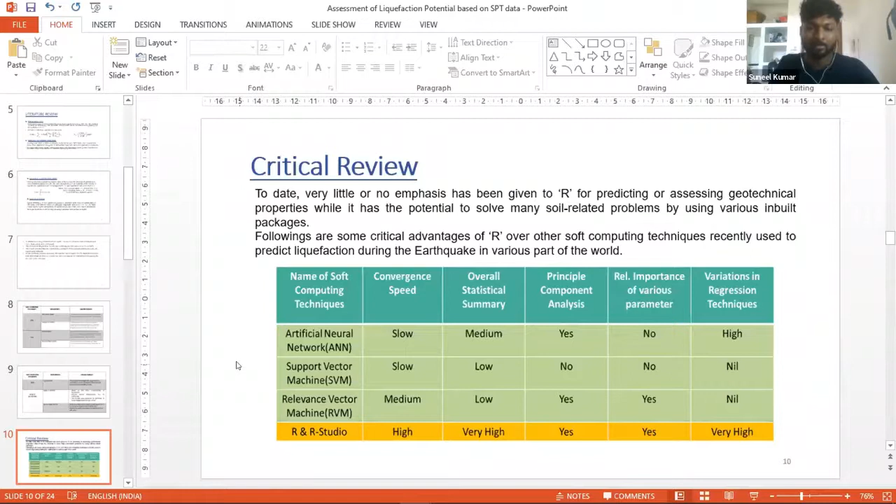On a broad aspect, machine learning is split into supervised or unsupervised. In supervised learning we use labeled data, and in unsupervised machine learning we use unlabeled data. Regression and classification come under labeled data, while clustering and PCA, which is principal component analysis, come under unsupervised machine learning.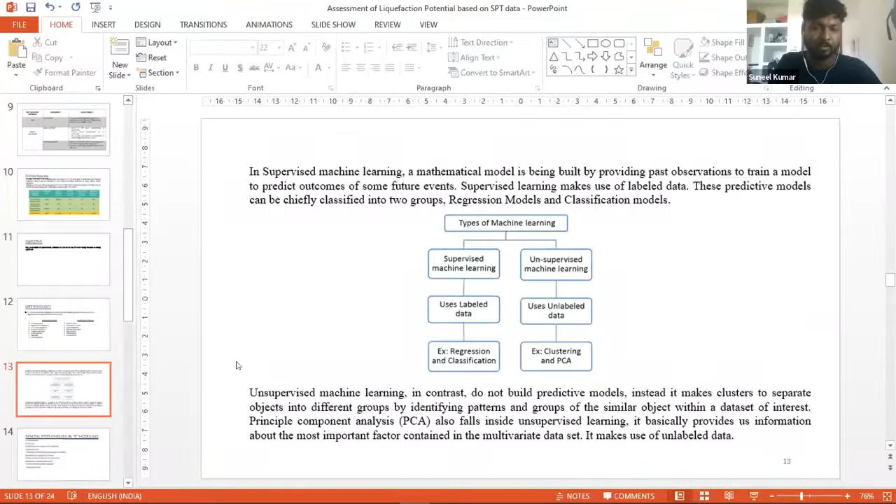What are the various steps involved in R? Initially we define the problem, then load the data, then split the data into training and testing data sets, select a certain model, and try to predict the model by training the data set. Once training is done, we test the data and various predictions are made.

Once prediction on the testing data set is done, cross-validation of the model is done, like k-fold and repeated cross-validation, especially for particular models. We compare different models using certain parameters like root mean square error, R square, coefficient of correlation, etc. Model refinement and model diagnosis is done, and finally the implementation of the model is also done.

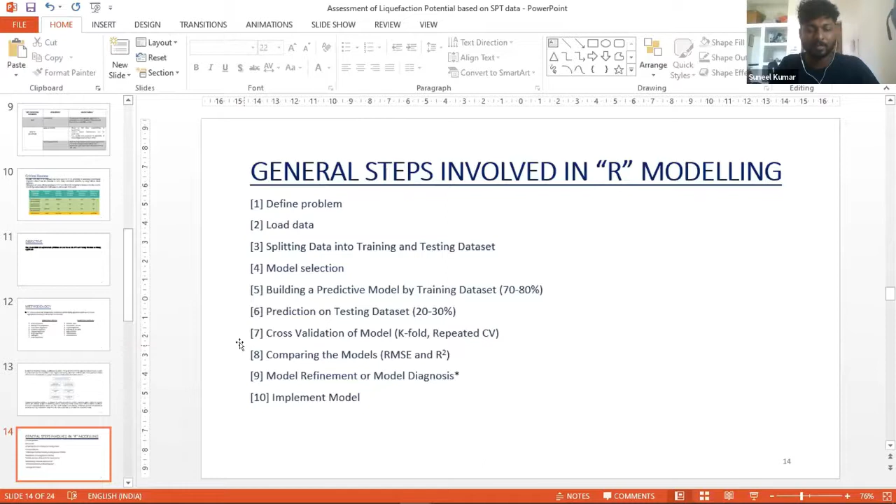Results and discussions. Here M is the magnitude of the earthquake. When I used k-fold linear regression, in this technique, whatever data is available is actually divided into different groups, called k number of groups.

Each group in that divided number of groups is selected for training or testing, and the other remaining k-1 number of groups are used for training. So finally we arrive at a regression model, a regression equation.

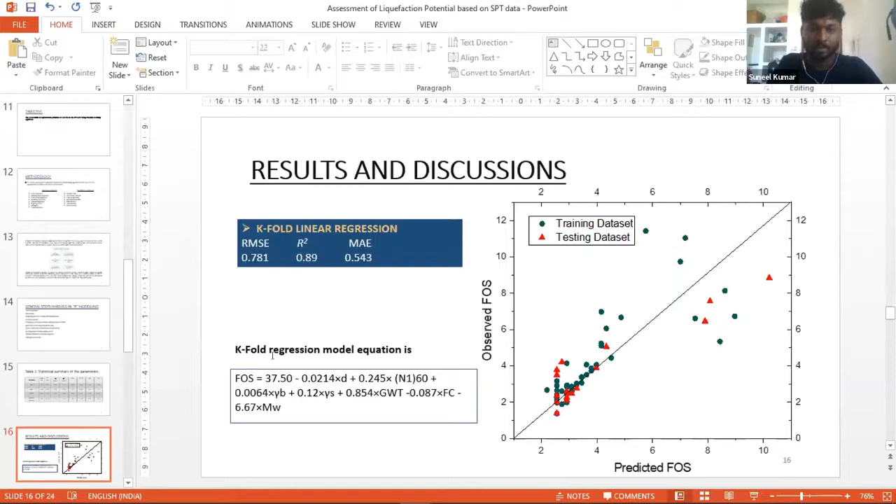These are the RMSE, R square, and MAE values of k-fold linear regression, and different equations are also obtained using the MLR method. I have used multiple linear regression analysis, where all the predictor variables are fed into the regression equation at once.

The SLR model is a stepwise linear regression, wherein if there are various number of variables available, we feed these variables one after another and try to find out a particular data set which has the highest impact factor.

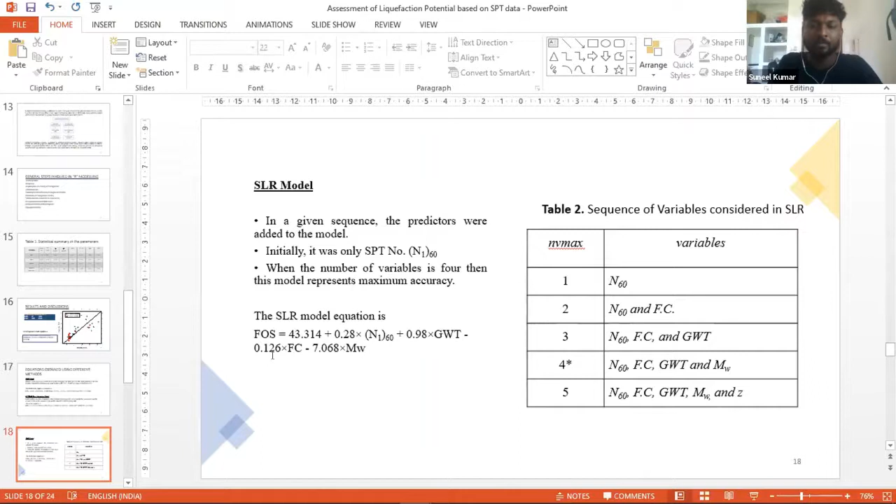This is the stepwise linear regression, and in Table 2 you can see NVMax, where NVMax means the number of variables considered. Here, with 4 variables - N60, fines content, groundwater table, and the magnitude of earthquake - this gives the best result in predicting whether the soil is liquefiable or not.

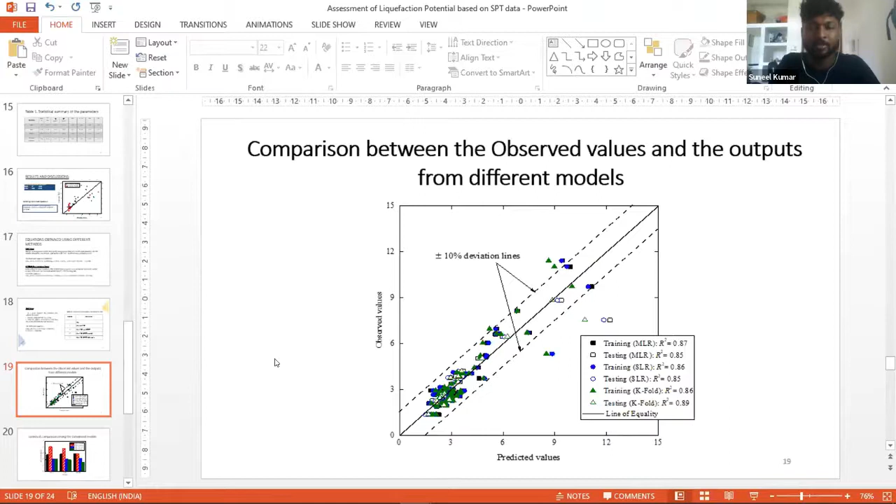Conclusions: I have worked on a total of 3 regression techniques. Out of these, the k-fold cross-validation model is the best method among the considered regression techniques, due to its reasonably good generalization capacity and lower values of RMSE and MAE. Three empirical expressions are also developed in this work, and from the analysis of obtained coefficients, it is found that SPT value and fines content are the most contributing parameters in the occurrence of liquefaction.

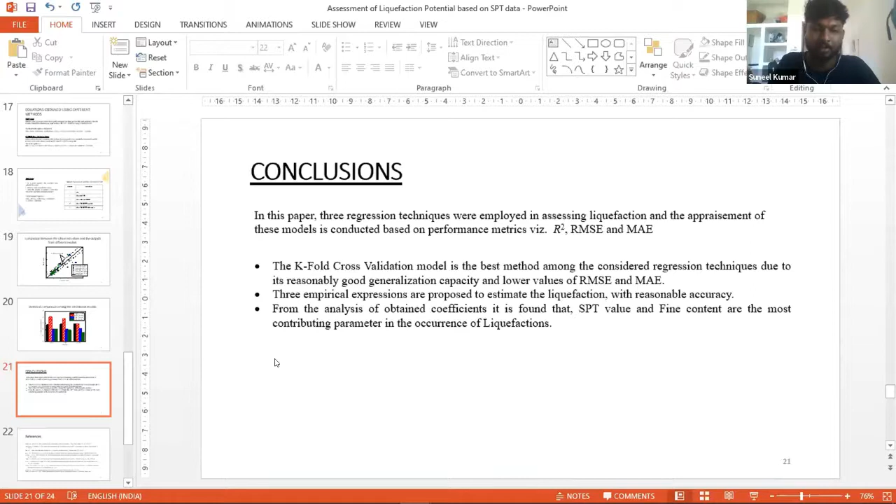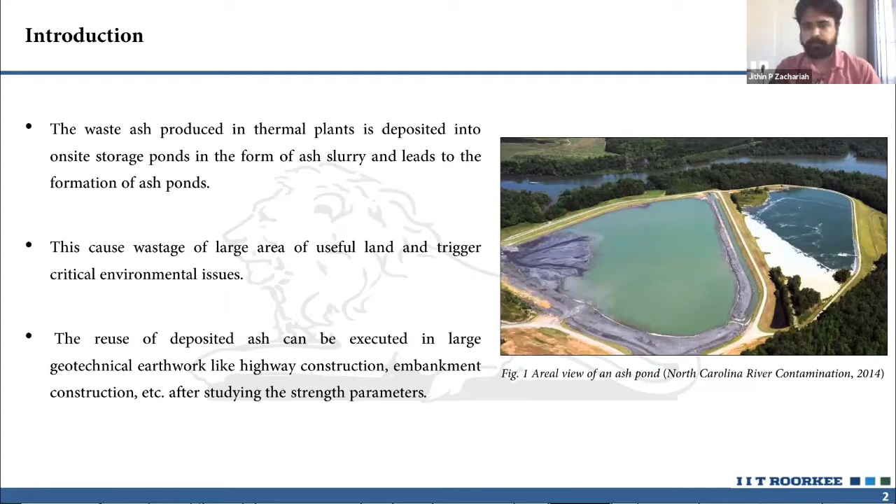The basic layout of an ash pond will be like this: there will be an inflow point and an outflow point, and we are depositing the ash in between. Various studies have been done on ash ponds and pond ash, and a mutual conclusion has been made by different authors - at inflow and outflow points we have different particle sizes, and it behaves like a cohesionless material, and it is susceptible to liquefaction.

So before using this ash, pond ash, or ash pond, we should study what is the liquefaction potential of this material - so this study focuses on that aspect. In this particular study, we have considered a power plant, Badarpur power plant in Delhi, which has a nearby ash pond of 3.5 square kilometers. They used the wet method, like a slurry deposit for ashes, and we have studied that ash pond using standard penetration test.

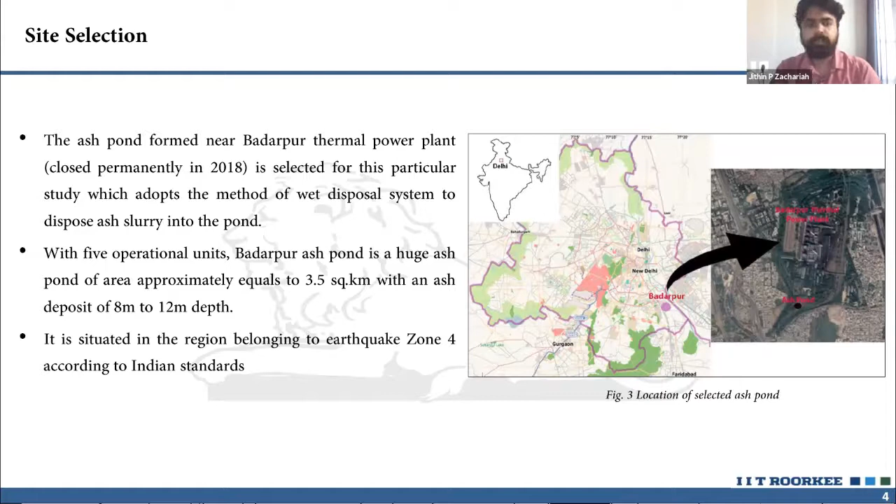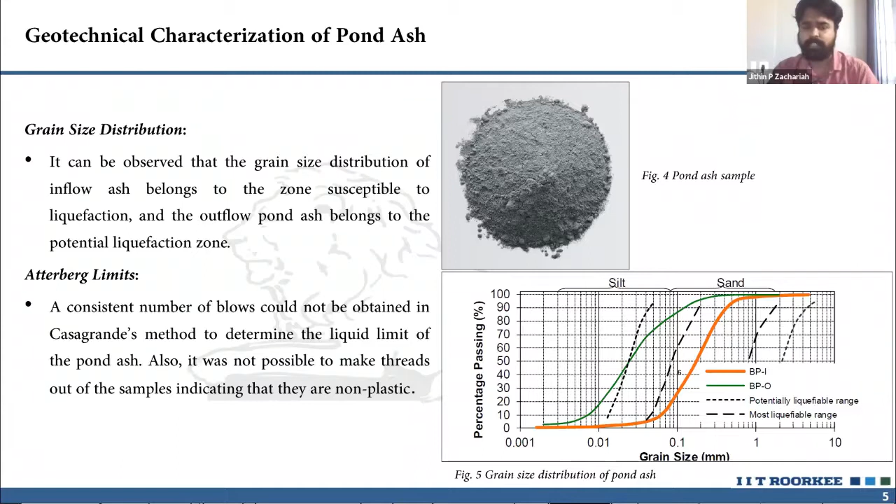When we take the liquefaction potential calculation, the basic procedure we know from Youd et al. 2001, we calculate the CSR and CRR. CSR is basically what the earthquake does to the soil when it happens, and cyclic resistance is how the soil reacts or resists the earthquake.

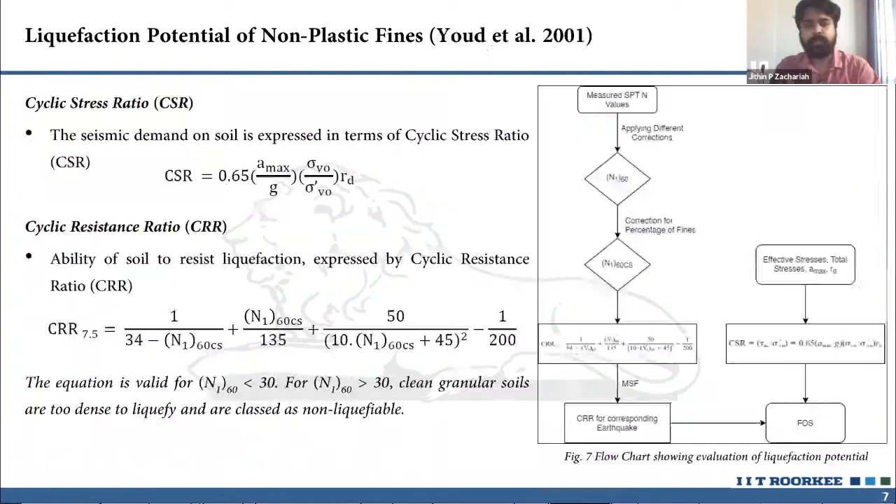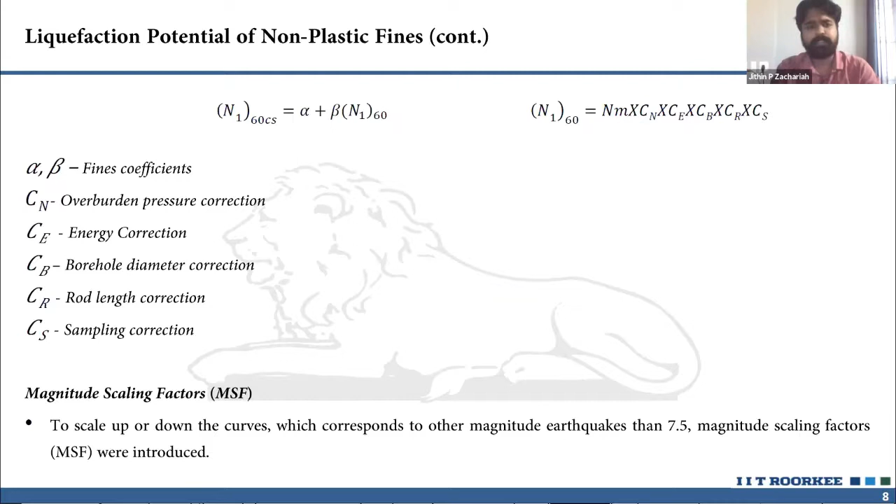We calculate the factor of safety from those two correlations, and we have other factors like alpha and beta, calculating N160 based on various corrections. We also have the magnitude scaling factor for scaling the magnitude of earthquake up or down, since these equations are developed based on 7.5 magnitude earthquake. From these calculations, we calculated the CSR and CRR values.

That means the soil is liquefiable. It can cause liquefaction of the pond ash. So we have considered a postulated magnitude 7 earthquake and an amax of 0.21 g.

So to conclude, let me say what my observation is. We have the pond ash site. When we applied the SPT method of calculating liquefaction potential to the pond ash, we observed that the pond ash is susceptible to liquefaction, or prone to liquefaction, under a 7 magnitude earthquake.

To reuse this pond ash or ash pond, I'm saying pond ash and ash pond separately because pond ash is the ash and ash pond is the total deposit. So to reuse whatever it is, the pond ash or the ash pond, we need to study a comprehensive liquefaction study on this material.

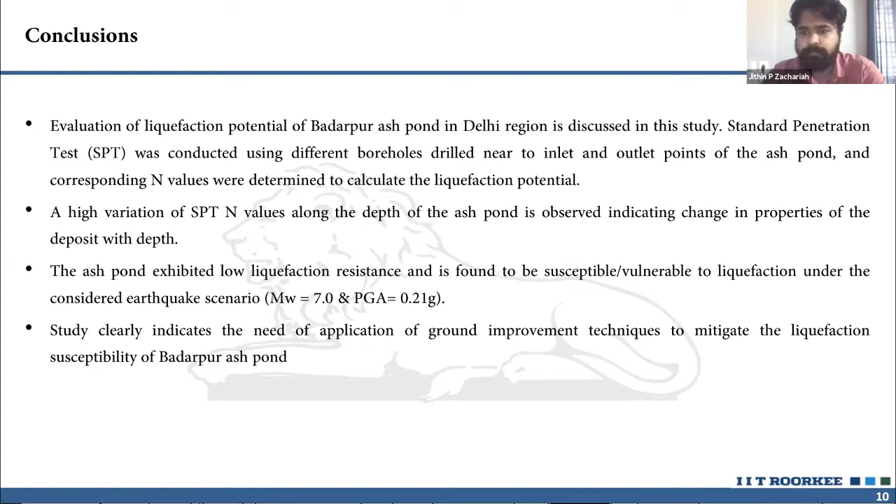You have explained in a very good, very nice way how ash pond affects liquefaction studies for different ground motion parameters. But there are many questions on these issues, because the ash pond is confined for a particular area.

So if we preserve that, if construction is not going on in that place, how to use it? What is its plastic index? Plastic index is the major thing to assess before liquefaction assessment. Because after some time it may react as a clay type formation or shale formation, or it will be brittle. So for use in soil liquefaction studies, you have to be safe properly and go for investigation properly.

Magnitude of earthquake is also very important, because it depends on what source you are taking. For Badarpur clay, that thermal power plant ash clays deposited in some places, you are using 7 point magnitude, taking SPTN values, then CRR correction, CSR correction, and using magnitude scale factor of 1. For MW 7.5 you have 1, but MW 7.0 you have to use a higher magnitude scale factor, maybe 1.1 or 1.12. You have also explained this in these places.